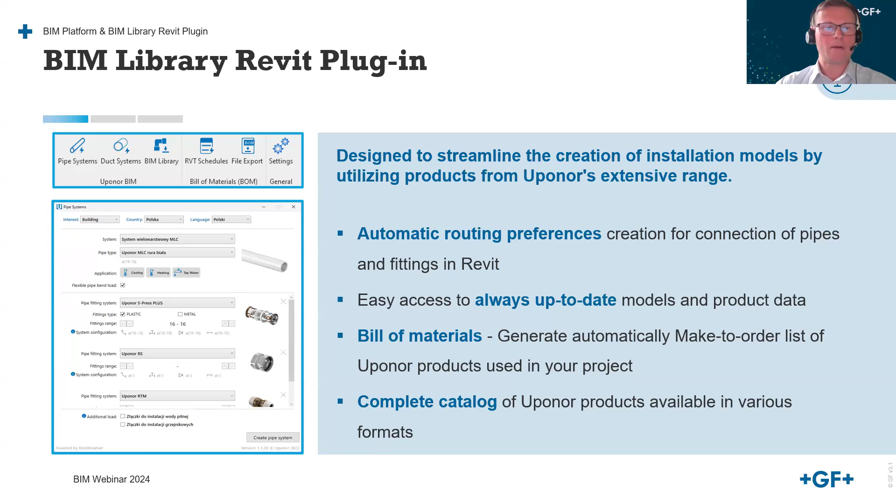Before we go to Revit and our plugin, I wanted to mention that generally today we are focused on how to support designers in Autodesk Revit software. However, to meet the growing demand for BIM components, we've expanded our cooperation with more software providers.

We've released a portfolio update for users of Solar, Linear, Trimble, and MagiCAD, allowing you to calculate projects using Uponor products in these platforms. We've also set up a process to enable communication between these software tools and the UFH Revit plugin.

If you have questions, feel free to contact us. More software integrations, of course, will be added next year.

Guys, it's time for the first case in Revit. So let's go to my Revit software - it's Revit 2022. I prepared for today case 1, transition between different pipework systems, and case 2, inserting a manifold from the Uponor BIM library plugin. Both I will try to solve thanks to our plugin.

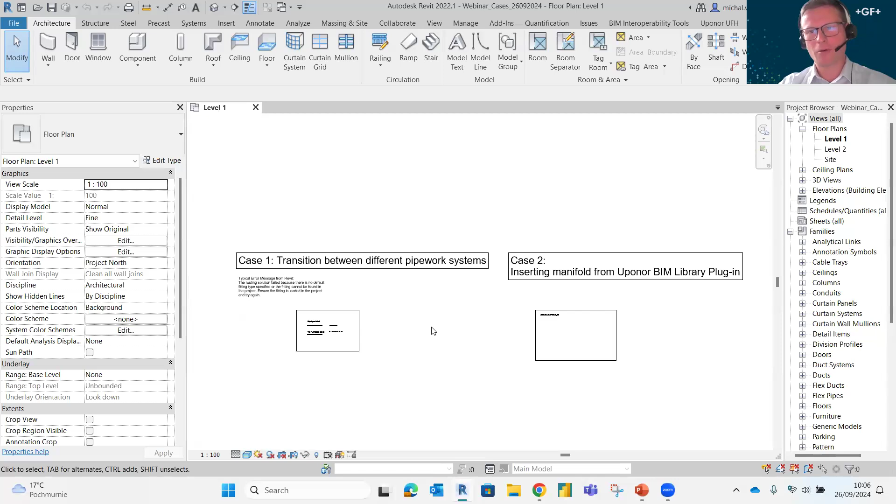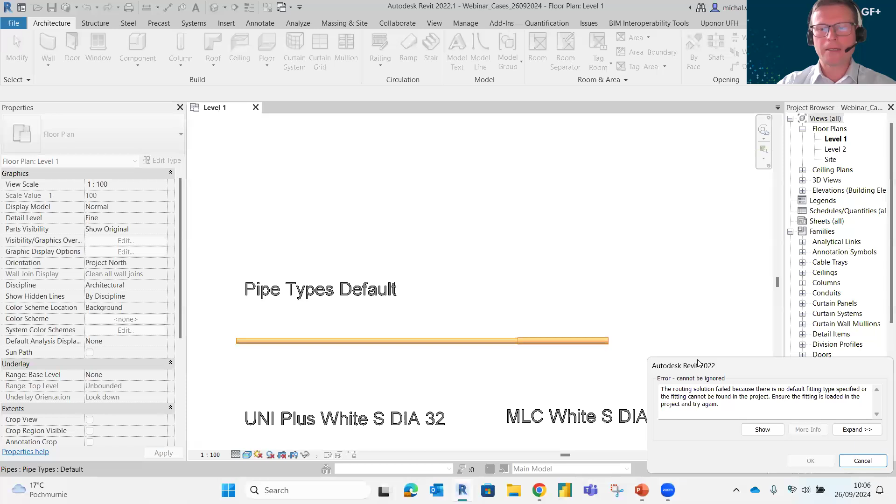But let's check what could be the potential typical issue. When you start the project in Revit, this is probably obvious for frequent Revit users, but if you use generic pipework systems, as you can see in properties, pipe types as default, and you try to make a transition, for example in that case, Revit generates this error: the routing solution failed because there is no default fitting type specified. This is one of the typical issues, especially at the beginning.

As you can see, when you select this default pipe, you go to edit type and to routing preferences - it's totally empty.

Nothing is filled, no families loaded in the project. This is a typical situation.

However, with our plugin, which you can find on the top after installation, Uponor BIM, you can see a few icons. Going from left: pipe systems, duct systems, BIM library, Revit schedules, file export, settings, connect elements, count pipe length, and patterns.

Today, to solve this particular issue, I will use pipe systems, and I will show you how to go through this case. So let's go to pipe systems now. I click the icon.

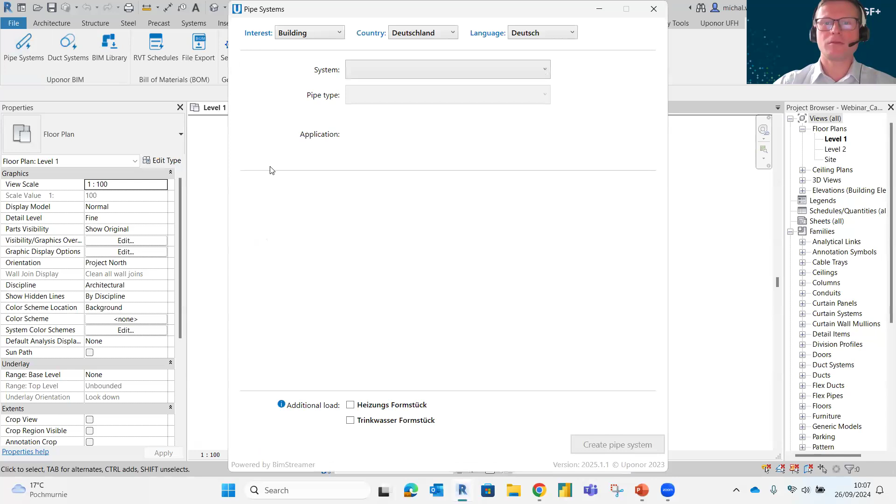Just to teach you, the first thing important to solve this case is to choose the interest. There is infra and building. We are inside today, so let's choose building. It's set to Deutschland as a market, but you can change it to any of your locations. Let's keep Deutschland for these purposes.

Here we've got the option to use always English language if you want, or the native language, so in that case the German one. But because I don't know German, let me choose English, of course.

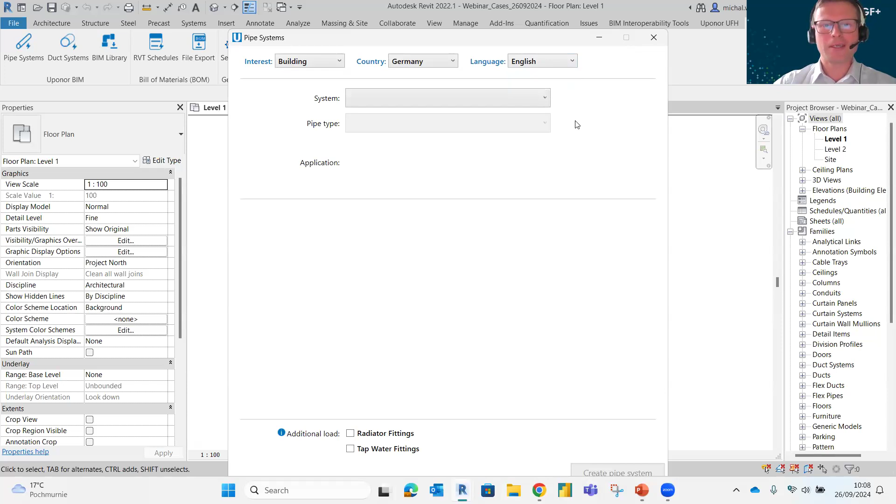And then we can go to choose the right system. As you can see here, we've got some heating and cooling pipes, local heat distribution, and so on. For purposes of this meeting, let's choose multi-layer pipe system.

Under pipe type, let's choose the MLC pipe white S. As you can see, you already have the preview of the dimensions, so diameters available. The general application, this pipework is designed for heating, cooling, and tap water.

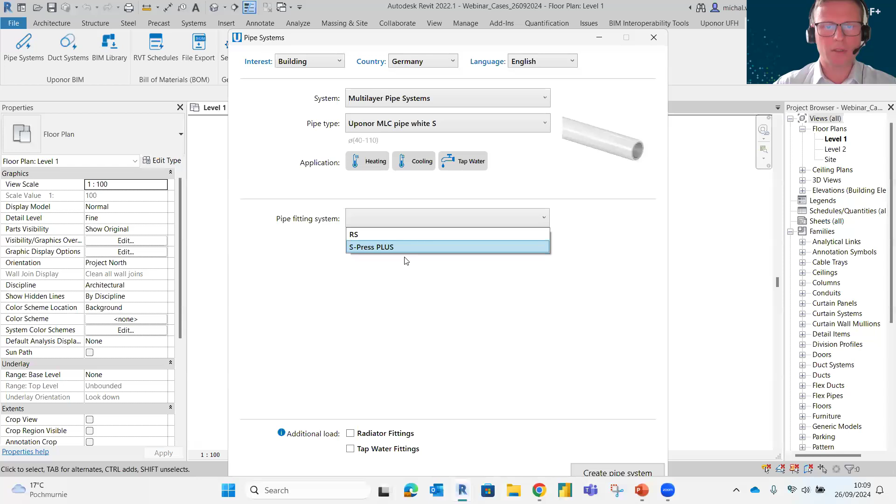Of course, we need to specify a pipe fitting system. There are two options, let's choose S-Press Plus in that case. As you can see, by default the plastic fittings are selected, so those products will be imported and loaded into your project because it's the economic point of view. But if you prefer metal, this is not a problem.

You can choose that. Note that the system doesn't completely cover the pipe range. You can solve it by using other systems or other pipe fitting systems. Generally it's not a problem for this case, but just mind that you have to always be aware of such a situation. If you also know that you will need other fittings for radiator or tap water in your project, you can tick them and they will be automatically loaded into your project.

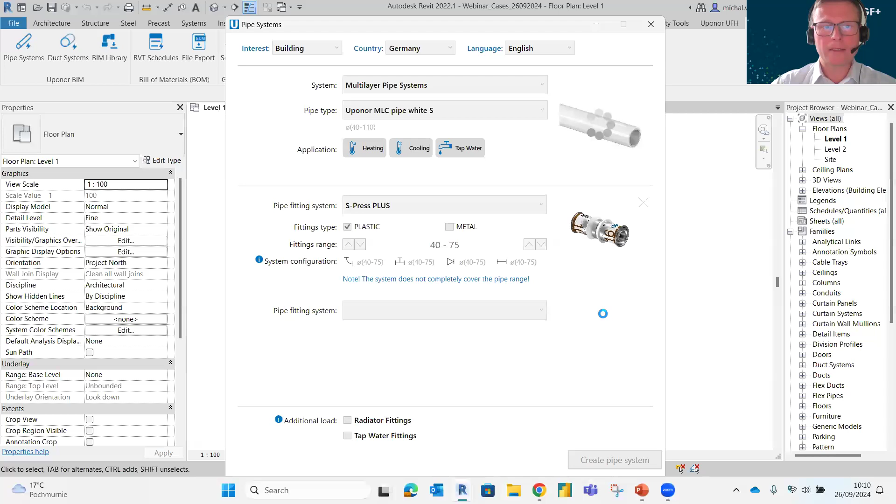If you are done, and we are done now, let's choose the Create Pipe System button. Now our plugin is loading the models, the families, into our project. As you can see, pipe system created successfully. We can click OK, close this window, and go back to our case.

So as I mentioned, we want to make a transition between different pipework systems with different diameters. I've done the same for other pipework, Uni Plus White S DIA, so this is already created.

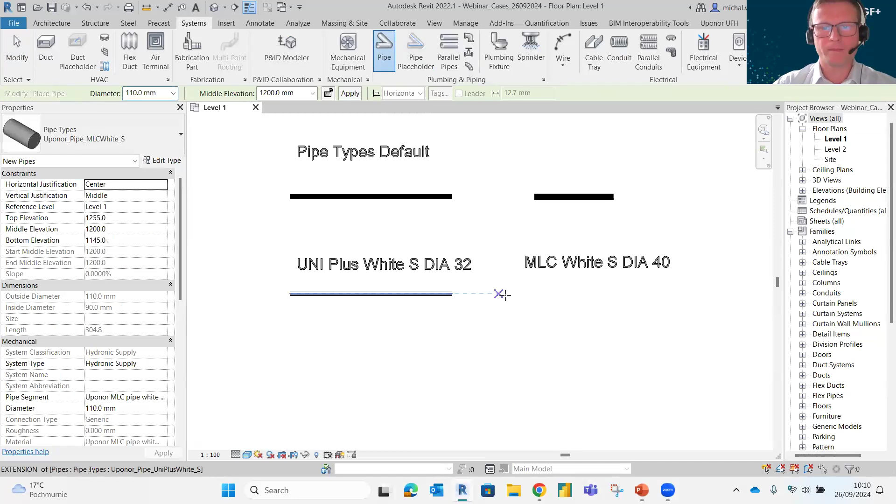Now, whatever, PI from keyboard or using systems here and creating pipe, let's draw the pipework which I already downloaded using our plugin. Let's choose the MLC White S here and put it here. Let's change diameter to 40.

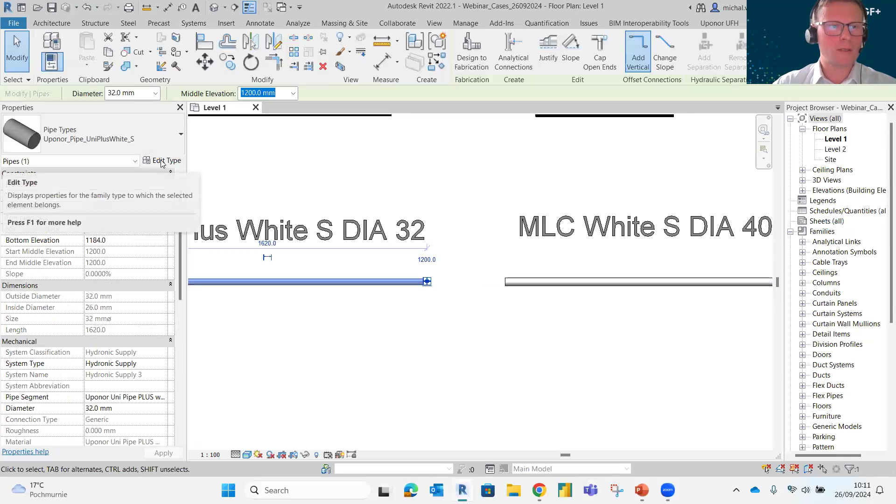And as you can see, still, Autodesk Revit doesn't allow you to create this transition. This is fine, this is normal. How to solve it? Of course we need to go to properties, edit type, and go to routing preferences.

As you can see now, the routing preferences are filled thanks to our plugin, so generally we are much closer to solving this issue. However, in that case, let's go to transition.

Always make sure here we have only one position, but sometimes it can happen there are more fittings in this system. Always make sure that both systems you want to make a transition between have the same fitting at the first position. There is priority, Revit reads the first position first.

The tip here is to change the minimum size to all. Click OK, click apply. Okay, this was done for Uni Plus White S.

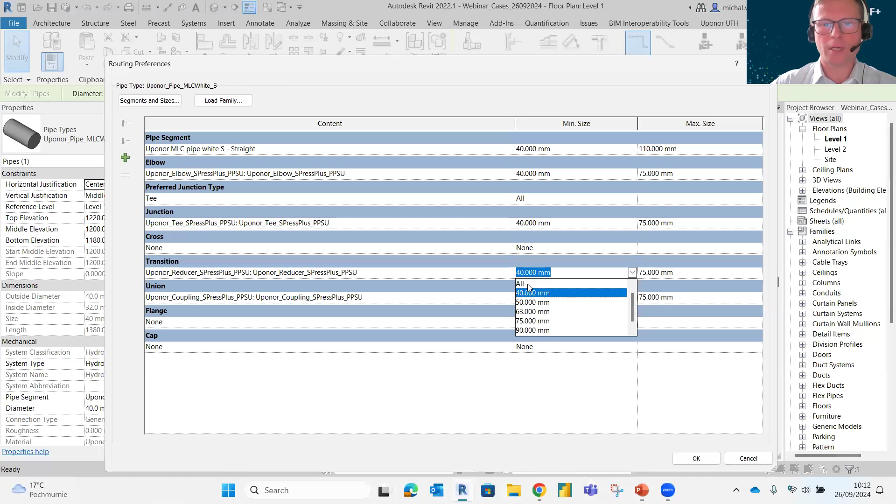Let's do exactly the same for another pipework system. So we go to routing preferences, under transition we check that we have the same fitting, and let's change minimum size to all here. Let's apply, let's click OK, and let's try now to create this transition.

As you can see, the transition is generated automatically, and that's what we wanted to achieve. That was the first case. Yeah, time is ticking.

Let's go to the second case. The second case might seem very easy because we would like to insert a manifold from the Uponor BIM library plugin, but I think we have to comment on this and show it.

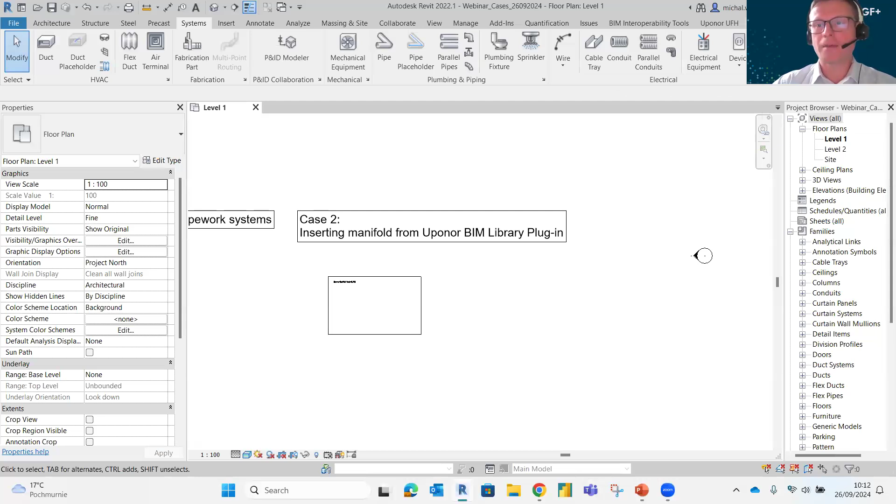Let's go to our Uponor BIM plugin. There is this third icon from the left, BIM library. Let's click it. As you can see here, we see our portfolio.

This is also important, to choose the interest first here. It's okay, we are in Germany, we use English language.

There are a couple of options for how to find the product you are interested in. If you know the article number of the product, you can type it directly here. If you know it's a manifold, for example as in our case, you can just select it in the browser tree. Importantly, the products available here are filtered to those available in the German market, so you're absolutely sure you can buy it, install it, and take it to the construction site.

Also, you can go by application. So if you'd like to check more of our products, you can choose things like heating and cooling pipes or manifolds, local heat distribution.

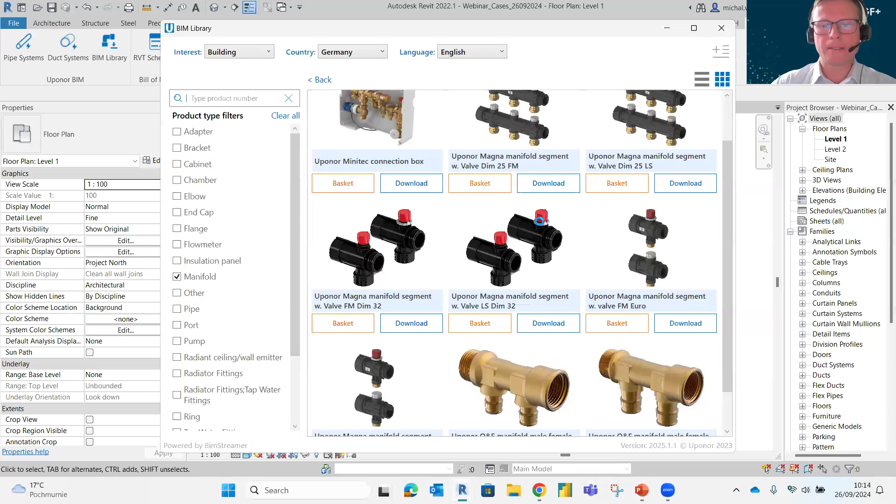For today's reasons, let's go to manifold. We are in Germany, and let's find maybe one or two products which we will put into our new project. Let's choose the Uponor Vario M manifold with flow meter. You can directly download it, or if you know you'll need other families or models, you can put it into the basket. Up to you - for this purpose, let's download it directly to our project.

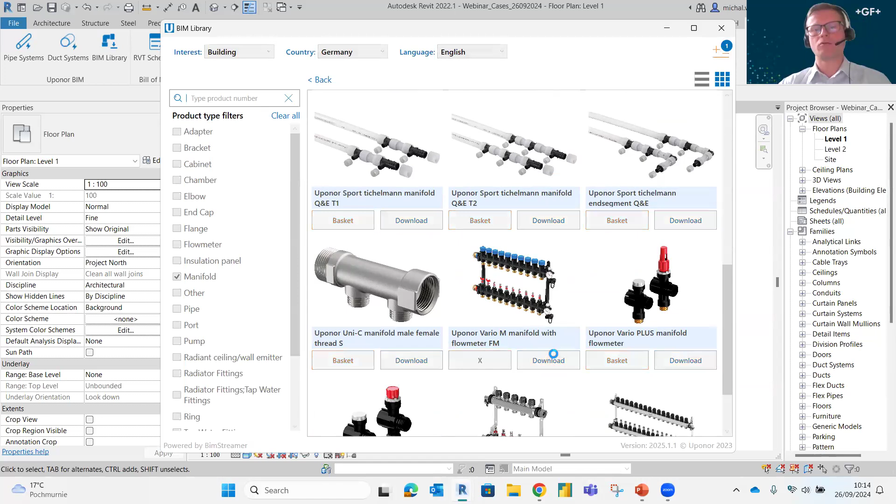The model, the family is already loading. Yes, it's here. Let's put it somewhere down here. I'm selecting this model now. As you can see, the manifold Vario MFM is loaded, and all possible outlets are here.

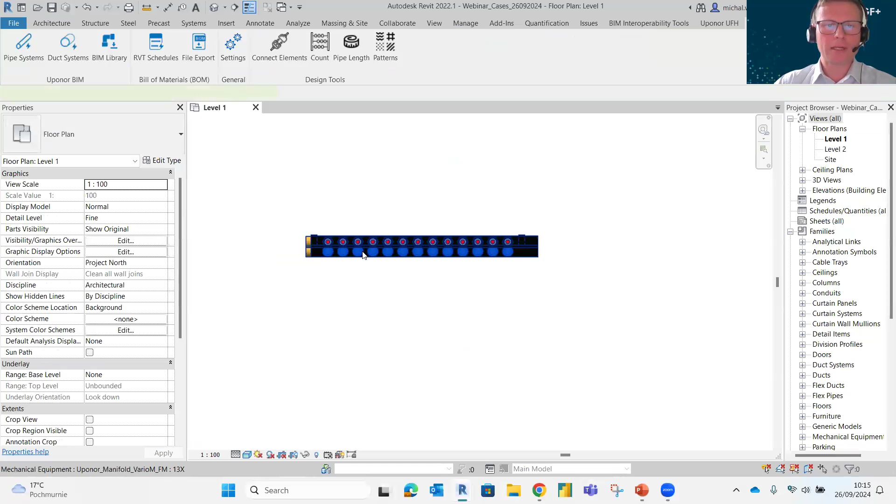A very important remark here is that our general suggestion, when using manufacturer families and models, is not to flip them. Please be very careful when you want to mirror something using the native feature of Revit. For example, in this case, let's go to 3D.

You see that the main return and supply pipework goes from the left, probably from the riser, from some kind of plant room, from the main heat source. If in your case you need to show it on the right side, don't flip it, as I mentioned.

Instead, select the family and always check what parameters are applied here by the company. In this case, as you can see under the construction tab in properties, we have a few parameters we added. To solve this issue, you can just select swap, and as you can see, this main run of pipework from the plant room, from the main heat source, will change position to the right side.

Let's do this again - swap - and this is the right, correct way to do it.

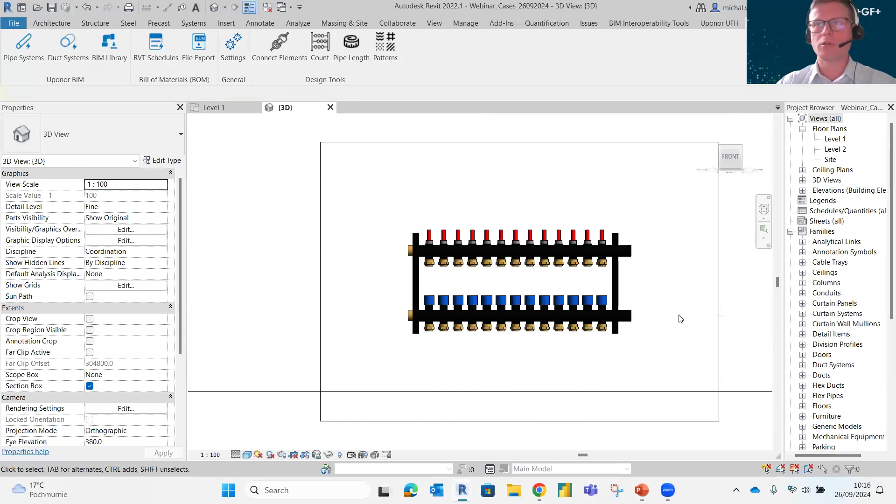If you, for example, need to add actuators - for example, to open or close the water flow to a particular zone loop - when you select the family, you've got that possibility here under actuator. You can add it by ticking the box. It should be a little bit bigger down here.

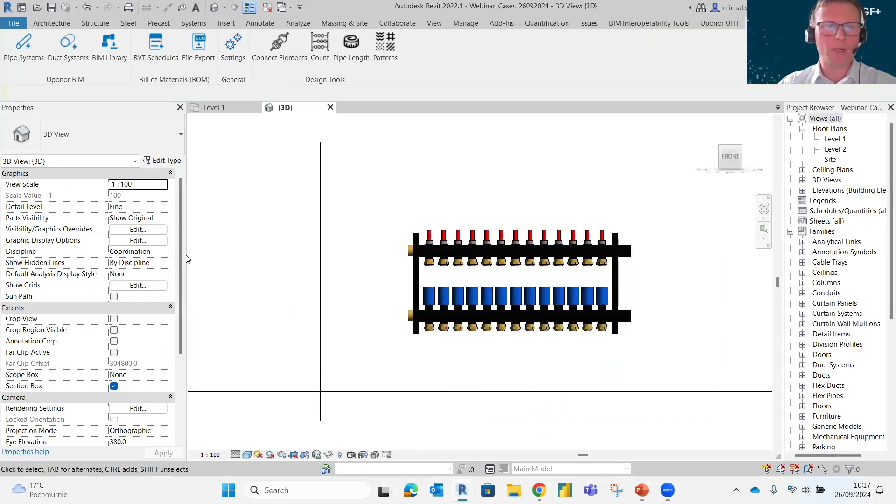What's also important, I think - sometimes let me drag it a little bit - sometimes we want to exchange the return with the supply on the upper bar. So when you select it, there is also an option to do so.

So, exchange lower upper bar. Now please note the return is below at the bottom. After ticking this, it should be replaced.

What already happened? Let's select it, and I'd like to show you another important thing - to avoid overlapping pipework in the layout of the return and supply, which goes to or from the manifold.

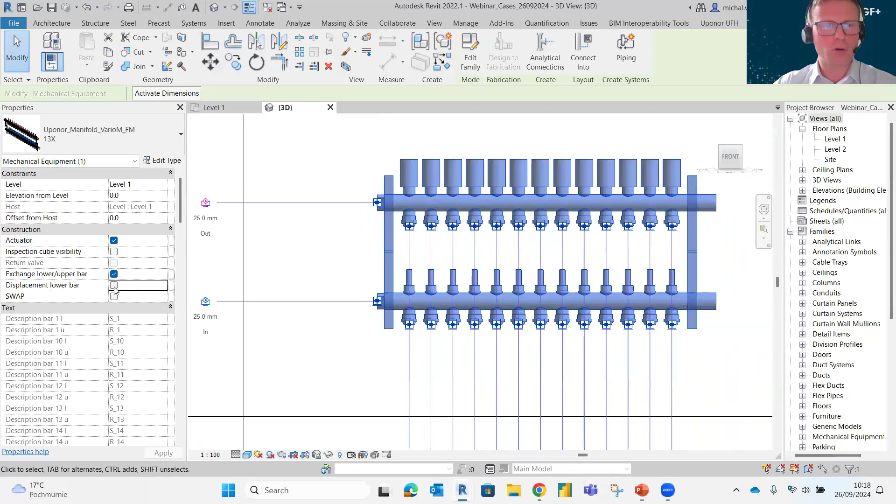You have a parameter here called displacement lower bar. If you select it, the connections will be moved a little bit to the right. When you deselect it, both of them will be one above another. So if you'd like to see them in a more readable version, click displacement lower bar, and I'll do it like that.

Okay, let's go back to our layout. Those were the two cases I wanted to cover today.

Now the question is where you can find this plugin, and all our other stuff. This is the BIM Platform, a website. Let's go to our website now - this is www.bim.uponor.com, our BIM platform, which we are really proud of.

The first choice you have to make is also choosing your interest, Uponor Building or Uponor Infra. Let's choose Uponor Building, and let's go to BIM Library.

As you can see, this is very similar to what you've got in Revit, but here we've got other formats for non-Revit users, which I'll cover in a moment, based on the same scenario. First, go here and choose your market, choose your country. Let's choose Germany. Also like in Revit, you have options to choose native language or English. Let me choose English. Now we are sure this portfolio is filtered to what is available in Germany.

Let's speak a bit about what UFH Revit Plug-in is. It's an exceptional tool that allows you to design, calculate, and model your underfloor heating project directly in Revit software. Today we will focus on two aspects of the plugin. One is quick project estimation, so you'll see how quickly you can arrive at hydraulic calculation and a complete bill of material. Then later I will show you our new innovative features developed recently by our team, including automatic feed pipe generation from the path and copy and mirror functions.

Let's jump to Revit then. All right, right now you should see my Revit software opened. I have a model opened here with some Revit architecture linked. I also have some spaces put here already in this apartment, and based on this apartment I will show you today how to get a quick estimation of your underfloor heating project.

One more thing maybe about the plugin—where it is located. As Michał mentioned, you can download this plugin directly from the BIM platform. And after you download and install it, you will see this as an additional tab here on your Revit ribbon.

So I have it open, I have it installed. Let's start with our designing process.

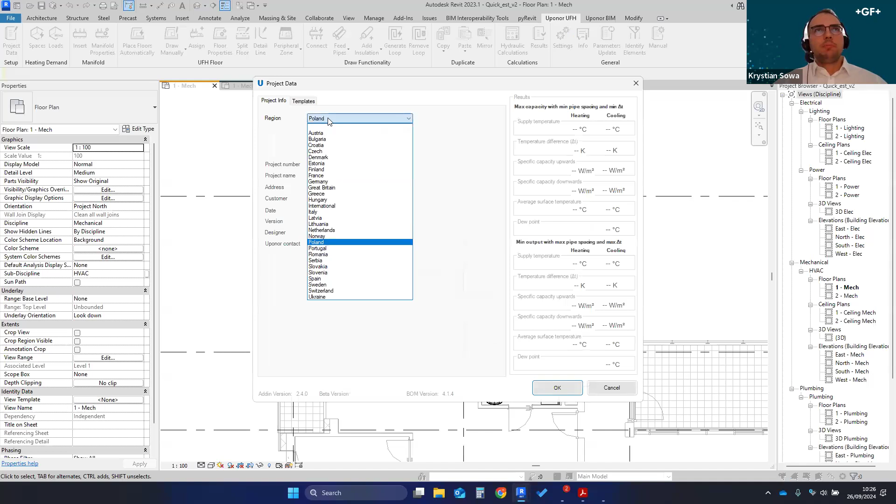Michał today started with Germany, so let's keep it like this. I will select Germany as well. Click apply. Selecting this region will ensure you that all of the items that you will be selecting with the plugin will be available in a given region, so you will avoid some mistakes and unnecessary work.

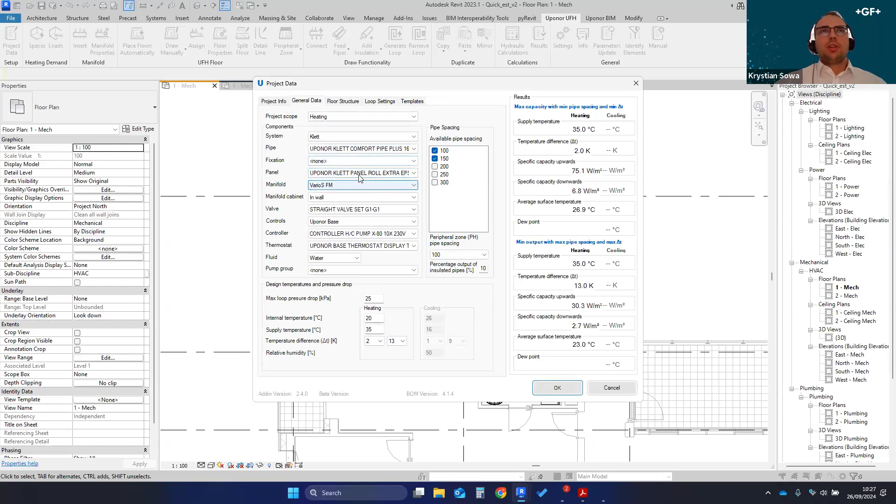In the general data tab, you will find the most important settings for your project. Starting from the top, we have the project scope, a very important setting. As I've mentioned, our plugin allows for heating and cooling calculations, so you can select simple heating, simple cooling, or a mix of these two. In my case, I would go for heating and cooling today.

Then you will see that already pre-filled is the list of the components of your underfloor heating system. This was pre-filled with our top products for each region, just to speed up your work. But of course you can adjust it to your own preference, so if you would like to use a different system, you can select it from this drop-down list.

In this list, we'll have all of the systems that are right now available in our region, which is Germany. What else can be found in these components are elements of the underfloor heating system, which is the pipe, panel, manifold, valve, room control system, etc. All of these settings you can specify here.

In the middle, you will find available pipe spacing that can be adjusted. In my case, I have selected 100, 150 for my project. At the bottom, we find design temperatures and pressure drop: first the pressure drop, and then the design temperatures like internal supply and temperature difference.

Please take a look now at the right side of this window, which is a very important part of our plugin. In this area, you will see the preview of the results that can be achieved with the given parameters that were set up here.

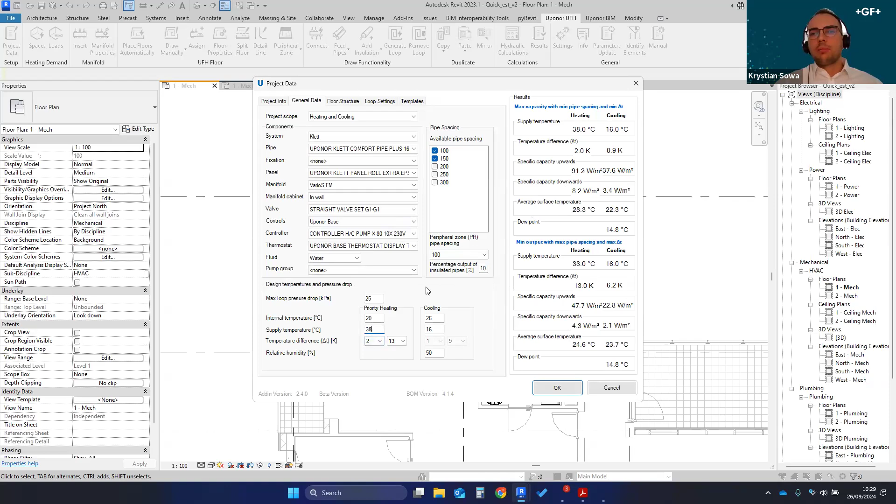All right, if everything was set up here, we can now go to the next tab, which would be the floor structure tab. Here we can set up two things: first, what is underneath the floor that we are designing, which will of course have an effect on our heat losses downwards, and second, also very important, the cross-section of our floor.

Each of the layers here will have an effect on our output up and down, so on our output and our heat losses.

Please take a look, for example, if I change the floor covering here - I have by default ceramic tiles and 90 watts per square meter of output. If I change it to, let's say, normal parquet, because parquet has much bigger resistance, it affects the output of the installation. So right now this output dropped from 90 to almost 65 watts per square meter.

As you can already tell, properly setting up all of these settings at the beginning of the project is very important, because it will ensure that later you get proper results from your hydraulic calculation of the installation.

We also have two additional tabs here: one is loop settings and the second is template, but I will not be focusing on these today, as we are only going to do at the beginning a quick estimation of your project.

So if you are doing a quick estimation, we will not be drawing any pipes in the model. Simply after everything was set up here, I will just click OK.

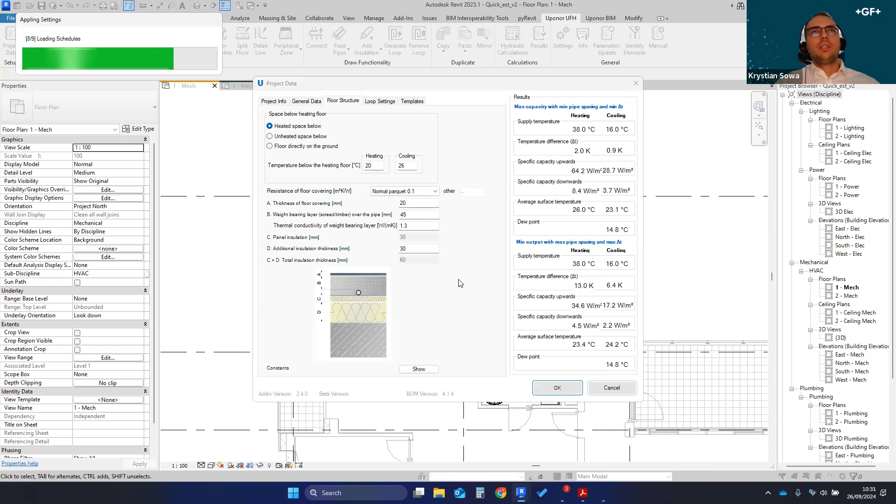This can take a bit of time, but thanks to selecting a region, you are sure that you will only design with correct items for each region. All right, this should be done exactly right now.

Before we start our design process, I always advise designers to use our view template for the floor plan, so let me change it right now. We provide the view template called UPO template. If you use this, which I always advise, you are sure that all the necessary visibility settings are correct, and you are seeing exactly what we want you to see so you can design properly with our plugin. So please always remember, while using our plugin, I strongly recommend using our view template.

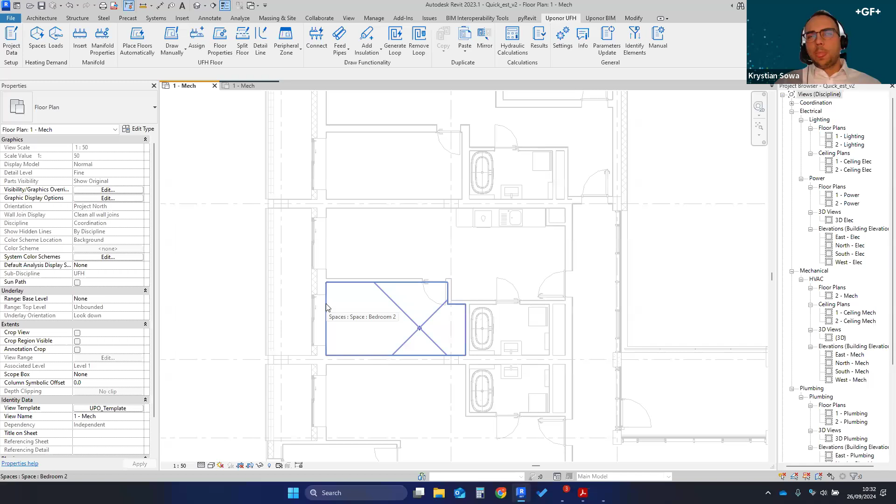All right, now would be the time to insert the spaces. If there are no spaces in your model, now would be the time to insert them. But I have them already inserted, as I showed you before. One more thing I'll mention about these spaces: I put some values in the design heating load parameter, because I'd like to show you how quickly you can transfer these parameters into our plugin.

So let's go to the third icon here, the loads icon. It will open a window with the list of all the spaces in the model, along with tables for design heating load, and in my case also cooling load, because as you remember in the general data, the scope was specified as heating and cooling.

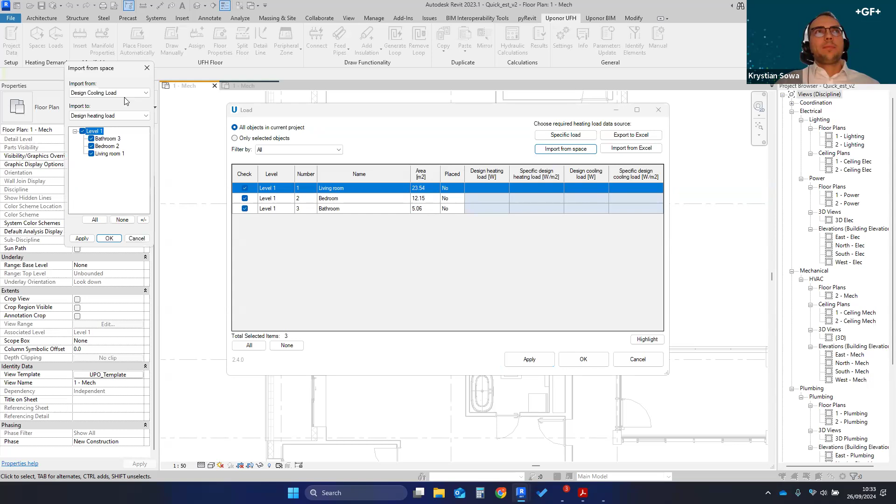So if I already have my heat demand value in some parameter in the space, I don't need to manually rewrite this into the plugin. I can simply use the option import from space, select the proper parameter - in my case, design heating load - click OK, and now these values are filled in for the correct spaces.

Another way to quickly put these values in is if you're assuming some coefficient. For example, for cooling, if you'd like to assume some value, let's say 30 watts per square meter, you can click on specific load, select cooling, put 30 watts per square meter, click OK, and for all of these spaces this value would be filled in already.

Another option is to import from an Excel file if you have your heat demand or cooling demand there. Or please remember you can always just put these values in manually - if you have them in a PDF file or some other source, you can type them in manually. If everything was set up properly here, let's just click OK.

And right now, let's go to the real design, let's say, to where the fun begins. So we would start with inserting the manifold.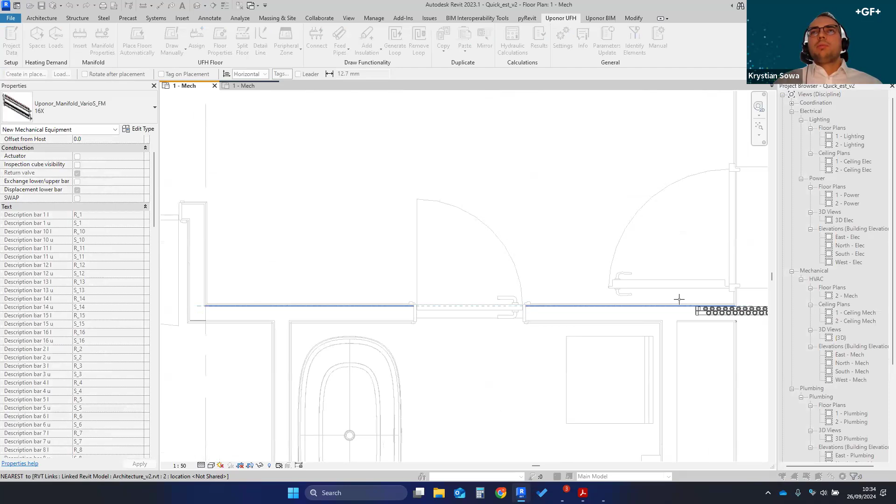So I would click on the insert icon here in the manifold part, and put my manifold. I can rotate it, of course, before placing it somewhere close to this bathroom, let's say.

Michał already told you a bit about this manifold, so I won't say much here, but I'll mention that Michał was talking about this displacement lower bar that allows you to avoid overlapping of the feed pipes. As you can tell, when inserting the manifold with our plugin, this parameter is checked by default - already checked in for your better use.

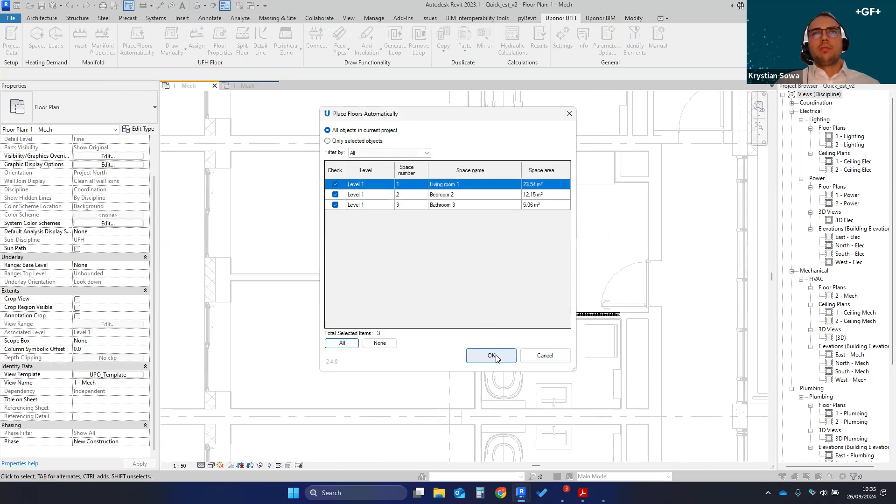Now that we have the manifold in our model, next we need to insert our heating and cooling floors. So I will use the option place floors automatically. In this window, I would select all of the spaces - in all three, I want to insert the floors. Click OK, and these green floors appeared in my model. If we click on them, we can tell this is the UFH standard zone floor.

Now that I have floors in the model, next I need to connect these floors together with my manifold, to assign them together. To do this, I will use the option Assign, located here. Select the manifold, select all of the floors, confirm with Finish. And now the plugin will also ask me about the name of the manifold.

Let's say I want to leave it as M1. Click OK. Now a few things will happen: these floors will be assigned to the manifold, and you'll see these connectors have appeared. These connectors indicate where you insert into the floor with the feed pipes coming from the manifold. After the calculation, they will get the pipe spacing, and you will see how to connect them.

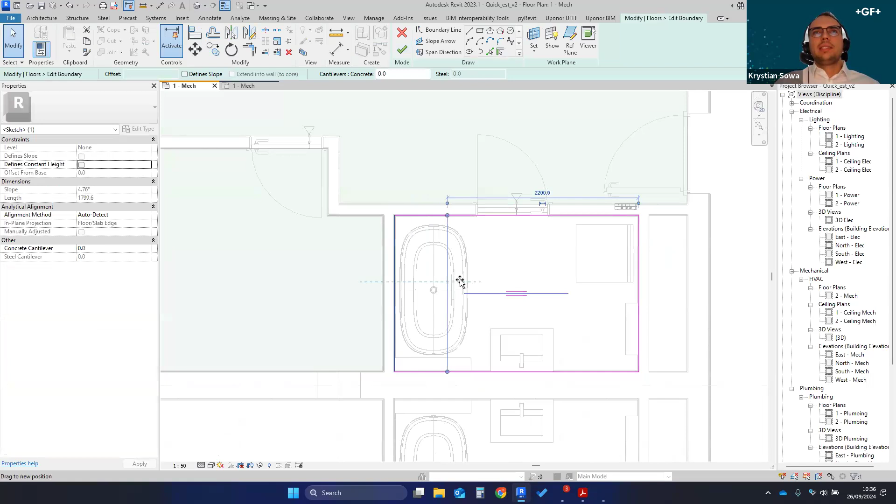Before we go to the hydraulic calculation, it might be needed to do some editing to your floors. For example, if you need to cut out some areas, let's say here underneath the bathtub, it is very easy using the Edit Boundary option. You just click Edit Boundary and edit the shape of the floor however you want. Let's do something like this. Click OK, and now underneath this bathtub we will have no underfloor heating placed.

Another way to edit the floor is to divide it. This area of the floor is pretty big, so we need to divide it into two parts. We can do this according to this wall. I would draw a detail line - this is the native Revit option, so if you type DL on the keyboard it gives you the same function. Then I click on split floor, select the floor, and select my line for the division. Click Finish, and I end up with two separate floors.

They are already connected to the manifold. After hydraulic calculation, the connector will appear, so you do not have to worry about this at all.

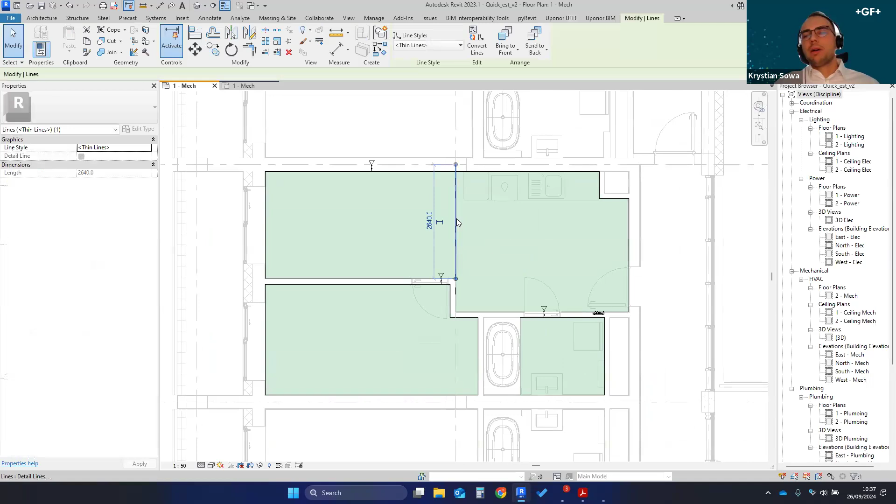One more thing before hydraulic calculation that you might want to do is, as you remember, in general data we were setting up, for example, floor covering. We set this as parquet for all of the floors, but you can edit each floor individually, of course.

So I have opened here the bathroom floor. I will change, for example, the supply temperature. I will also change the covering here in the floor structure tab - so from parquet I would just go to thin ceramic tiles. I think it would be more appropriate for our bathroom.

If this initial editing was done by you, and if required - in my case I needed to cut this out and divide this into two - then it's a good time to go to the hydraulic calculation window. Let's click here in part calculations. There's the hydraulic calculation window. Click OK. Select the manifold. Click OK.

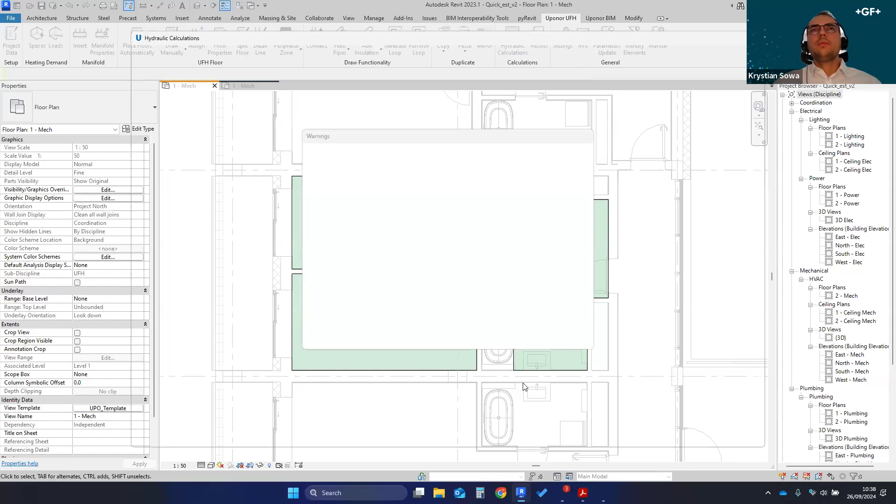Two windows have appeared. The first window is regarding warnings and errors within your installation. You can expect warnings about not covering your heat demand, or about laminar flow, exceeded temperatures, and so on. These types of warnings might appear here. You can close this window right here.

Let's talk a bit about this hydraulic calculation window. This window was divided by us into two parts: the part at the top is regarding the manifolds, and the part at the bottom is regarding the floors. All of the necessary parameters were placed here in the manifolds and floors tab. You can scroll to the right to see all of them.

If there is a need for you to edit, for example, pipe spacing or delta T, you can easily do so. For example, if you want to edit pipe spacing, you just expand the list and select a different pipe spacing. If you want to edit delta T, you can just type in a different value, click apply, and it will be recalculated.

You can also easily switch here between heating and cooling modes. So if you see here, I am in heating mode. If I just click here, I would be easily switched to the cooling calculations.

You might be wondering how we were able to get these calculations already at this stage, because I'd like to remind you that we do not have any pipe yet inside our model. We were able to do this based on virtual lengths of the pipes - calculating the distance between the connector and the manifold, and also calculating the loop length inside the floor based on the area and the pipe spacing. Thanks to this, without drawing any pipes in your model, you are able to get hydraulic calculation, balancing, and also the bill of material. Let me close this window by clicking OK.

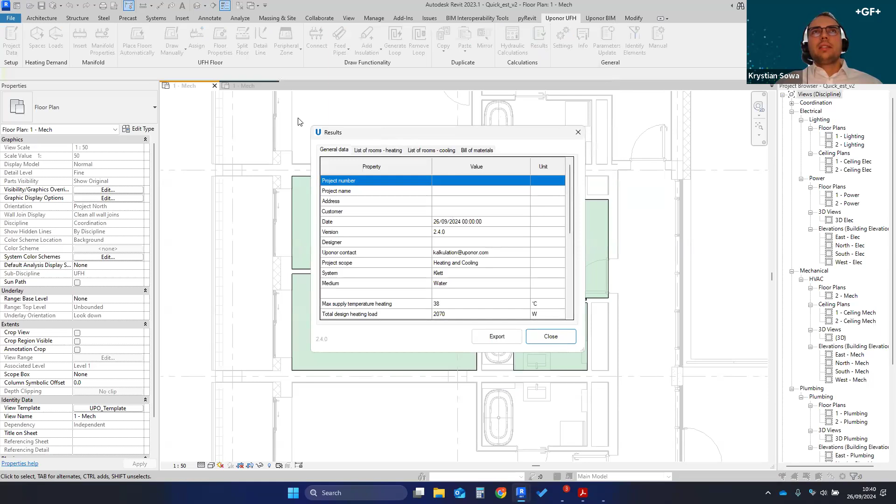And just to confirm my words, I will now go to the results icon, select the manifold, click OK, and we can already inspect the results for our quick estimation of the project. So here we have the general data, list of rooms heating, list of rooms cooling, and lastly, bill of materials. This can be exported to PDF as well.

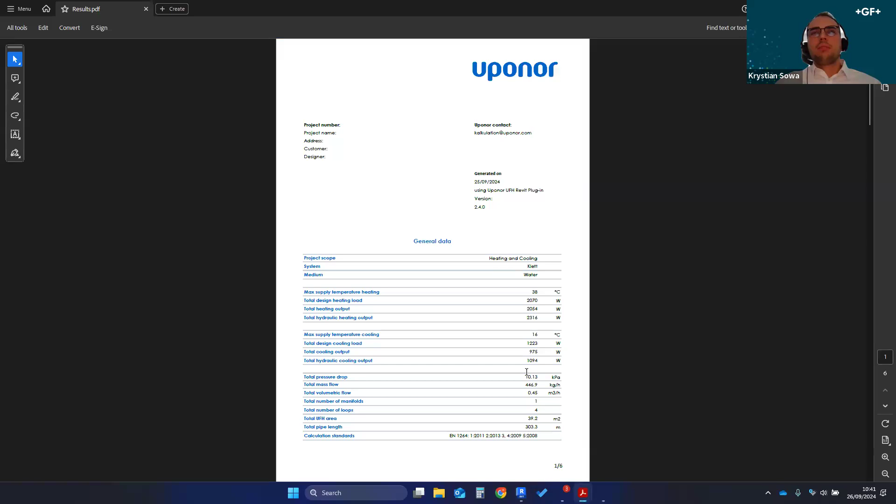Let me quickly show you this PDF that was exported. So once again, we have the general data, list of rooms cooling, heating, list of rooms for cooling. Then there is results for hydraulic calculation, the same as what you saw in the hydraulic calculation window in the plugin. And lastly, there is a full bill of material.

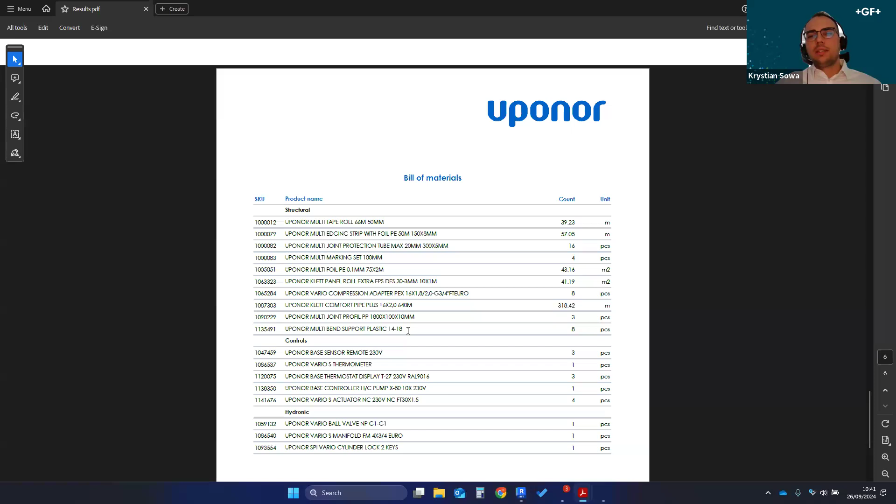As you noticed in the model, from the families, basically I have only the manifold right now. This is the only family that I have in my model. But it was not a problem for our plugin to generate a full bill of material with all of the items necessary to complete this installation.

So I hope to conclude this first part, I hope this would be something useful for you. And if you would face the need of doing a quick project estimation, or if you are at the early stage of your project and you want to present some initial bill of materials, then it is very easy. I think without my talking, it would take like 10 minutes to do this apartment, to be honest with you. If you are fluent with this plugin, maybe even less. So it is very quick how fast you can do this type of estimation for your project.

That's it when it comes to this basic quick estimation of the project. And right now, I would like to show you some new features that we've developed for this plugin, because we also know that this plugin can and is used for quick estimation, but also our clients use it for the full complete project of this type of installations.

And if you were doing this in the past, you already know that drawing all of these feed pipes from the manifold, connecting to the floors and so on, is taking lots and lots of time. And we are constantly thinking how to speed up this process for you.

So let me show you now what are the couple of features that might enhance and speed up your design process. So I would firstly adjust my connectors. Please allow me to do so. I would put them in the correct place where I would like to enter with my pipes. And this one, maybe I will move a bit here. Maybe also move the manifold a bit from this wall.

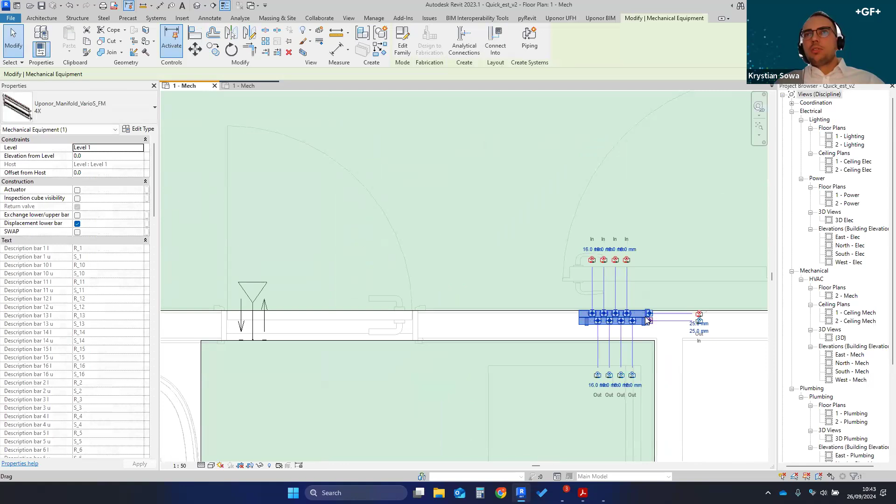All right, and the first part for generating the feed pipes would be to use the option connect that we have here, because you know, the manifold is placed at a certain height. You would need to go with a vertical pipe, then make a bend, then insert the floor. To avoid all of this, please always use our option connect. All you need to do is select the manifold, accept these properties, and select the point for direction somewhere in here, let's say. Already it was generated automatically.

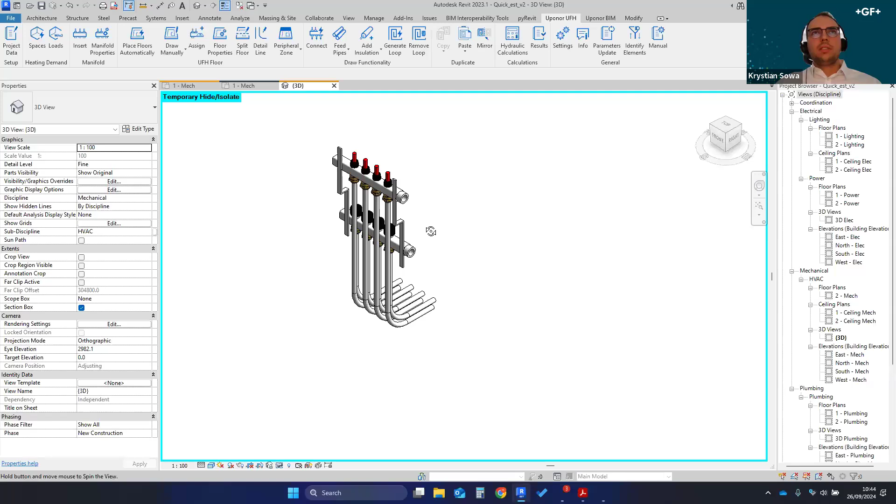Let me select this, go to 3D. Since we are in Revit, let's use the advantages of this software. So go to the 3D view, maybe also do it like this. And please see, this was generated all automatically. I just clicked one function and all of these pipes with bends, at the proper height, inserting the floors, all of this generated automatically.

But that's not the end. You do not need to anymore draw these feed pipes one by one, because we recently developed this new feature called generating from path. What it means is that all you need to do now is draw the path from the detail line. Once again, we will be using this detail line here. And then based on this path, the plugin will generate feed pipes for you.

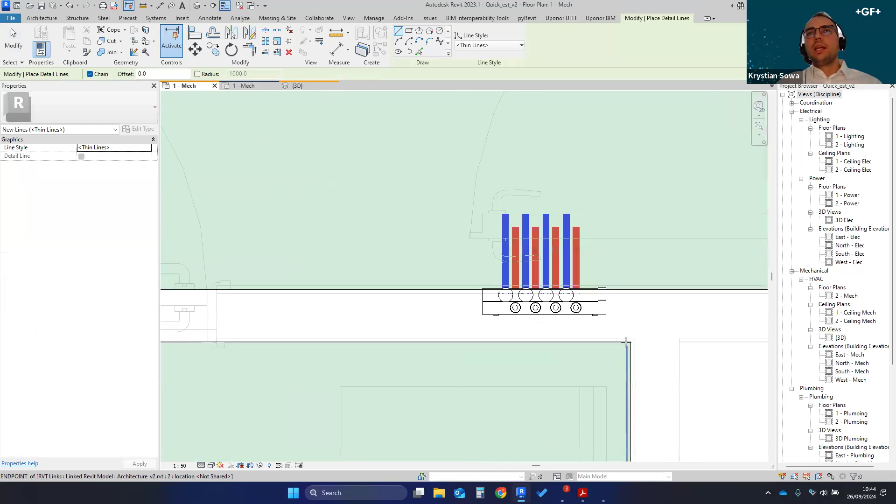So let's start doing so. I will type DL on my keyboard, and somewhere within the box of the manifold, doesn't matter where, let's say somewhere in here, I will just click. All you need to do is make sure that this line is within the box of the manifold. I will go and connect my first connector. Also the same case, does not need to be very precise, does not need to snap to anything. All you need to do is make sure that this line is within the box of the connector, and that's it.

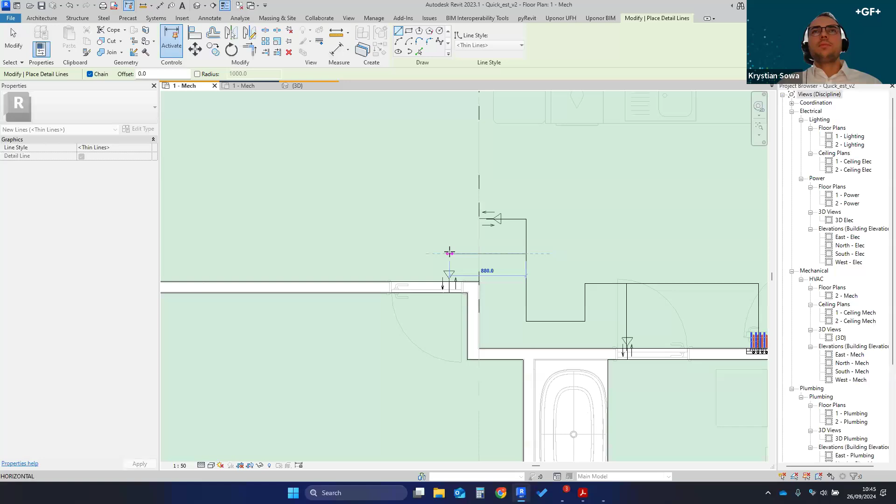The first connector is connected with my line. Now I will continue my path starting from here. Let's go down to fill out this gap, then up to the next connector, somewhere in the middle of it. All of my connectors here are connected.

This one I will leave for last, because if the manifold is located on the same floor as the floor you would like to connect, you need to cut out some part of the area to be able to easily bend the pipe. Because in Revit, we are not drawing lines, but drawing pipes, so you need space to properly bend it. I will show you that in a second.

But first, let's focus on this path that is now drawn. Let's click on feed pipes and generate from path, the first option here. Type in the pipe spacing you want to use, so let's stick with 150. Now select all of the detail lines that were drawn. I will draw this rectangle and click finish.

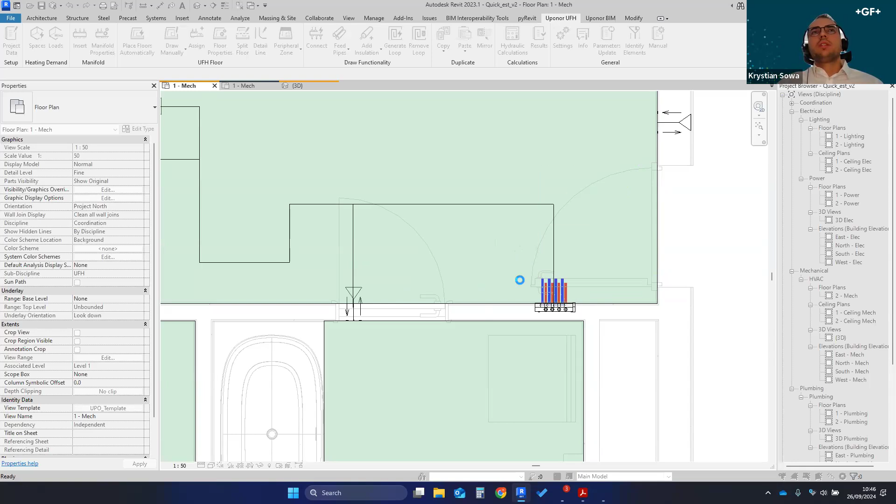All you need to do is point to the plugin from which side of the connector you want to start, since you can start from right or left. I want to leave this right feed pipes for this connector, so I'll click somewhere on the left, and that's it. All of this was generated automatically. Let me zoom out to give you a full picture: generate from path, select all my feed pipes, click finish, point for direction, the path disappears, and what appears in its place is the connectors with the proper pipe spacing of 150 millimeters that we specified.

I hope this feature will speed up your design process. It is already used by our customers and our designing team, and we are improving it all the time. I hope this might be a very good way for you to speed up your design process. Due to time limitations, I cannot show you the full process of designing here.

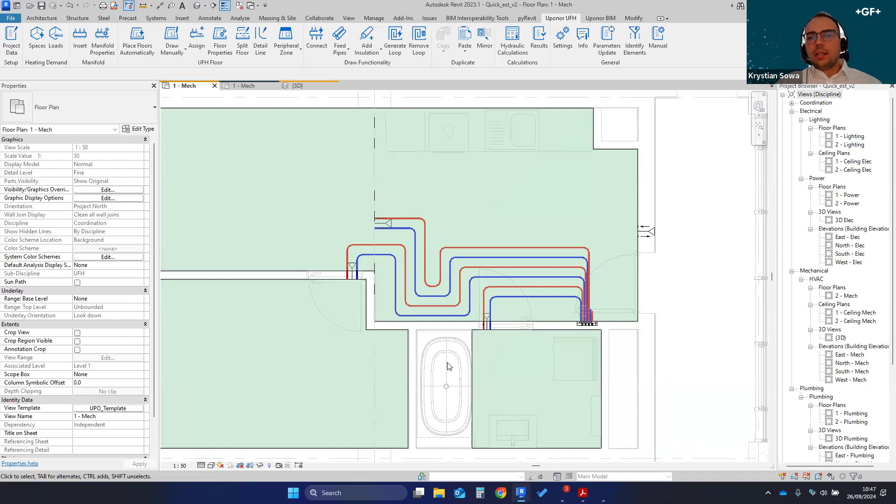So please allow me to jump to my second project that I have prepared. It is exactly the same project, but here you will see that the areas below the feed pipes were cut out and changed to type feed pipe zone. As I mentioned before, you need some space to bend the pipes to this connector. I simplified this, so use it in that case.

I sped this up because I wanted to show you two other features we have: copy and mirror. But before that, I would like to complete my installation, which of course means generating the loops. Sorry, not feed pipes, but the loops. You can draw this manually, but there's no need to with our plugin.

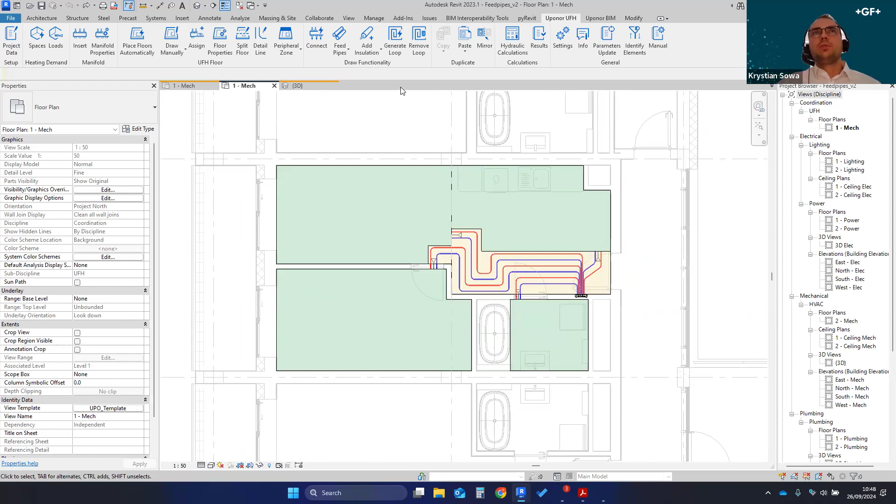We can click on the Generate Loop icon, select all of the floors, click finish, and the plugin will generate the proper shape of the loop. You can select between spiral and meander shape. In my case, I selected spiral, so this is the result I expected, and this is exactly what I got.

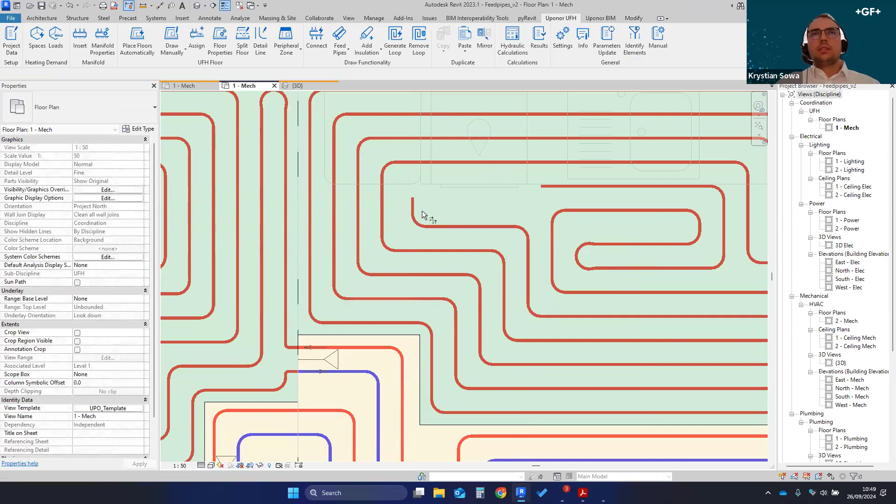If there is a need for you to edit the layout of the loop, of course it is possible. For example, let's say I would like to fill this gap a little bit more. I can simply edit this manually: delete this bend, and use draw pipe like this. Now we have this gap filled. So it's very easy to fill these gaps if needed to correct something, as you see.

Before I show you the copy and mirror functions, let's go to hydraulic calculations one more time and inspect what is happening there. You need to understand one important thing about this plugin: before, it was taking the virtual lengths of the pipes when they weren't in the model, but now, since all the pipes are already drawn, it will take the physical lengths directly into the hydraulic calculation window. So any changes you make, like filling this gap, will affect the hydraulic calculation.

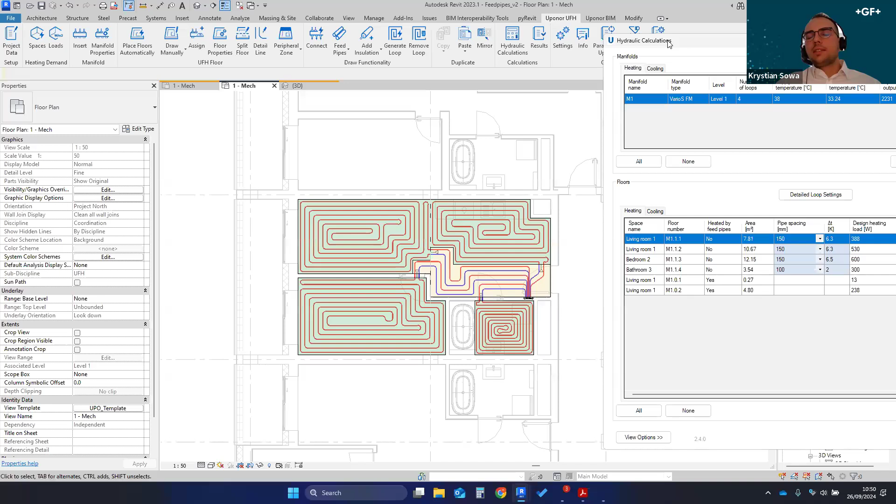So this is as close to the reality as possible, because you have exactly the pipes drawn and exactly the same loop length here in the hydraulic calculation window. If nothing is to be changed here, let's just click OK to confirm it.

The last two features I would like to present are mirroring and copying. As Michał mentioned, mirroring the manifold directly is something we do not advise - it would not work properly and would cause issues with the pipe systems. This is something we were able to correct within our plugin, and we developed these two features: copy and mirror.

I draw here a detail line because, as you see, the right side of this building is symmetrical. On the right side, I have exactly the mirror of the installation that is on the left, so you do not need to draw the second part from scratch. You can simply finish this part and then select it.

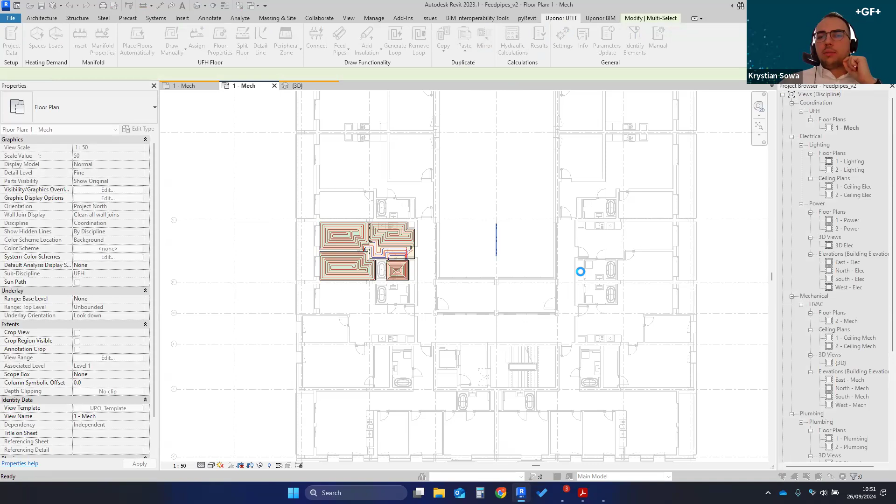Click on mirror here, select the line for mirroring - this detail line that I drew. Right now the plugin will mirror the whole installation, mirroring the manifold properly as well. It will also ask about the name of the new manifold, because two manifolds cannot have the same name, so we will specify a new name - let's call it M2 - and according to this new name, the systems will also be renamed.

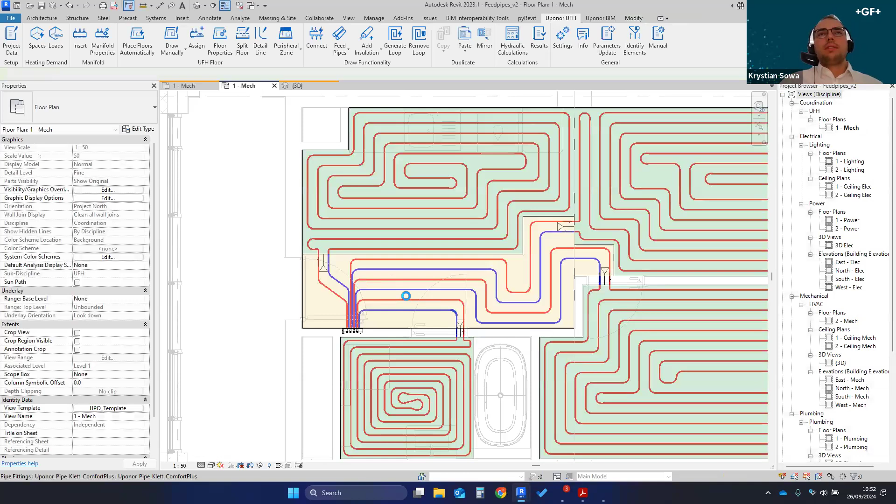Let's give it a second to do this job, and then we'll be able to see, after I zoom out, that this installation was mirrored exactly like it was here. You can click on the manifold and see that right now it is renamed to M2, and the systems were also renamed - system name is now M2, and in the loop it is also M2. That's how easy you can mirror the installation.

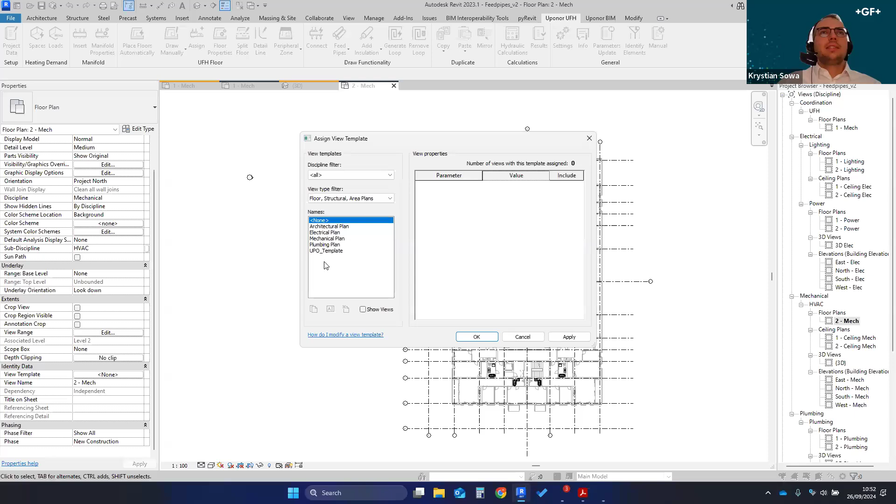The same way goes for copying it. So I will jump now to the second floor of my building. This is exactly the same floor that was below, so if this is the case, I will just set up once again the view template, go back to my floor below, and close this 3D view.

Select once again this installation, click copy between views - in my case, not in the same view but between views. Wait a bit for the plugin to put all of this necessary data to the clipboard, then jump to the second floor. Here I will use the option paste, and in my case, align to current view - I'll choose this one.

And right now, the same case as with mirroring - the plugin will ask for the name of the new manifold. Let's say I would like to name it M3 to avoid naming it the same. Very quickly, the plugin will rename it and also rename all of the systems. So right now, if we select the pipe for example, you see that it is named M3.

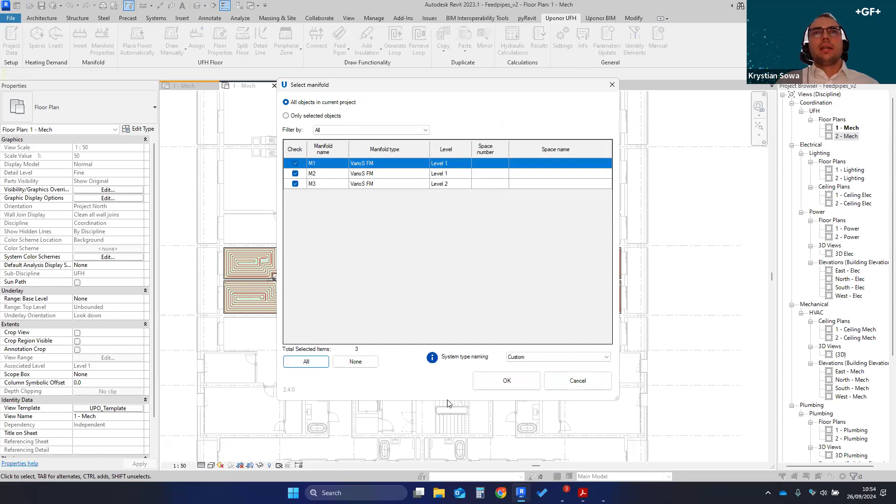Lastly, we can also go to the hydraulic calculation, so you can see that right now we will have 3 manifolds there. I will select all of them and click OK. I would like to show you that if your building is symmetrical, all you need to do is design one part, make sure it is properly set up, and then you can just mirror and copy it - no problem for this plugin. Let me close the results window, and you will see here exactly the same, or very similar, results now in these three different manifolds.

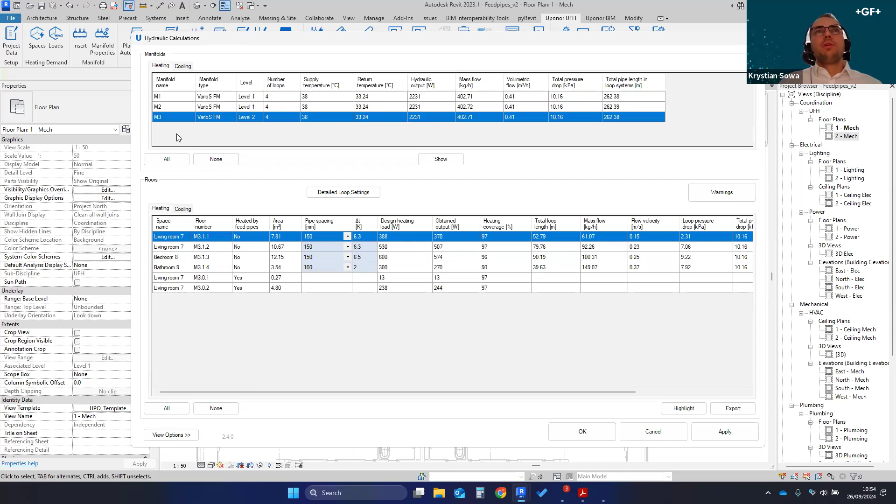All right guys, that would be it from my side. This is all that I wanted to show you. So just to sum this up, the first part was regarding hydraulic quick project estimation, and the second part about our new innovative features. This is, of course, not covering the whole abilities of our plugin, the whole scope of this plugin.

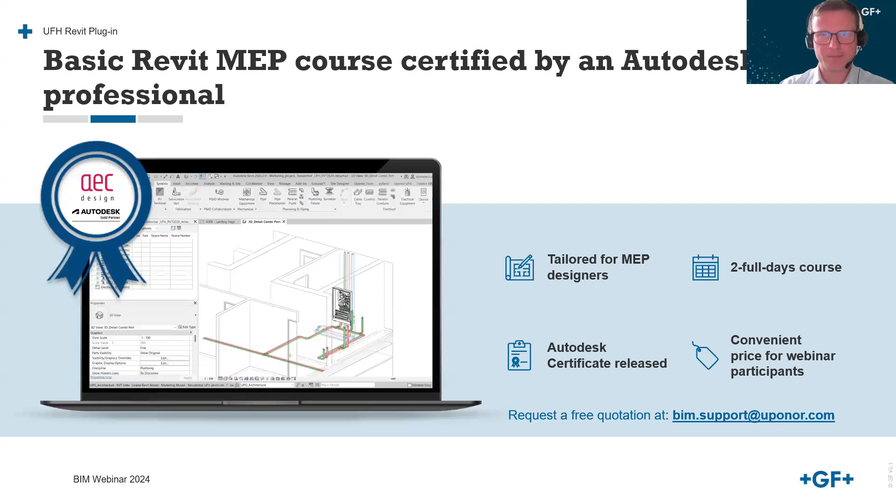Now it's tough for me to take part after your presentation, guys. So I will try to go to it. Just a second. Okay, so I am Domenico.

I am also part of the BIM Service team. Like Miko, I'm working strictly in contact with the customer, in my case from the DACH region, Southwestern Europe, and outside of Europe, so in the international environment.

I'm here today to present our BIM design services. It's a topic particularly important for me because I had the luck to contribute to the development of these services. We kept them for last, not because they're less important than the tools the guys presented, but because this closes the circle of our offering.

With Miko and Chris, you had the possibility to see our free tools that are a way to get in contact with the customer, but on different levels. With the library, you use the components on your own to start modeling your project. On the second level, you use our tool, and you get even closer to us because of the support that Miko presented. And here, basically, you get the closest possible to the Uponor design team because you ask us to prepare the design for you.

There are a lot of points I could present as advantages of our service, but I want to be practical and leave that to the marketing or the website. What I really think is the benefit of this service is the expertise we put in the game. Uponor has been in the design and engineering field for many years. So in this service, you find the BIM competencies, the engineering competencies our design team brings, and the knowledge of our solutions and portfolio. Combining these three points makes us the best partner to design using our solutions. This is the real strength of our BIM service.

We mean it not only for designers, because we have a lot of scripts and tools, beyond the one we showed, that we use internally to speed up the process. But also because we know what installers need. So this is a very good part of our offering for designers, installers, and contractors, and you will also see it for off-site modular manufacturers. But I want to keep this practical because I want to keep up with the guys — we'll have a challenge later on how many guests stayed until my part, so I need to compete here.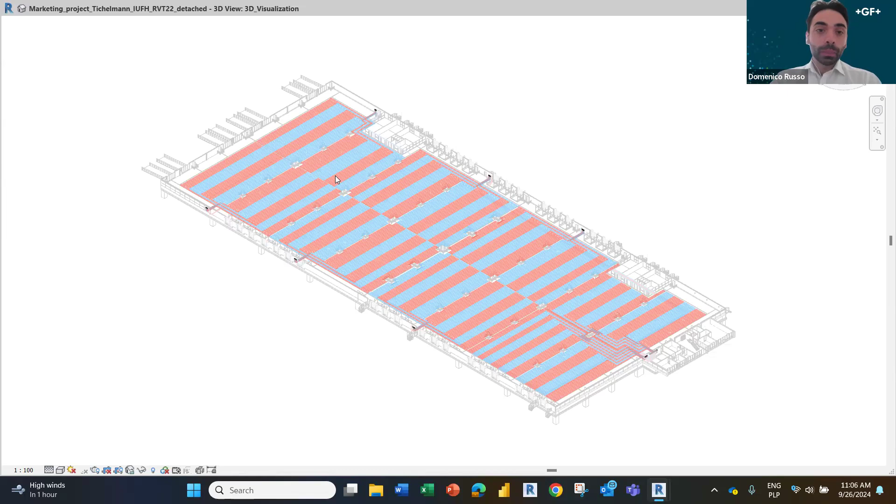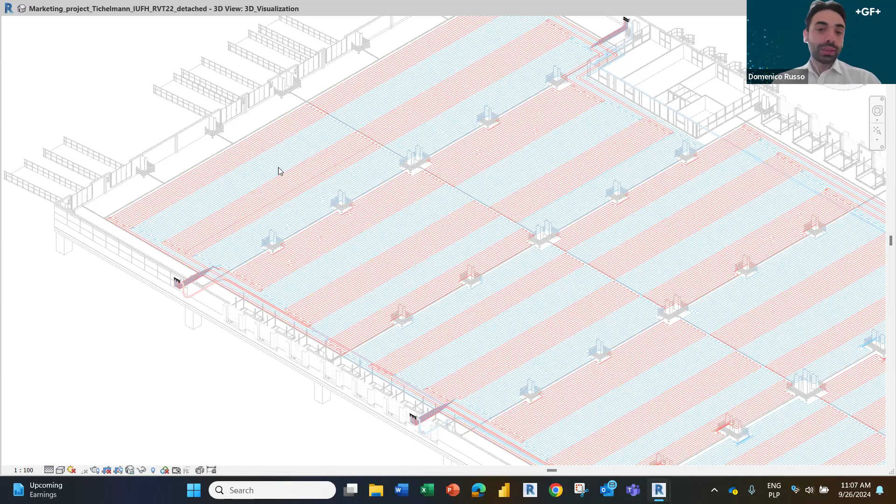Let's start. The first model I'll show you is industrial underfloor heating. This kind of application is really rising on the market because logistic companies, but also real estate, design and build companies in this field are now digitalizing their processes. They want the digital model for the construction site, but also the asset information model for facility management when they hand over the project. So we see a lot of cases regarding this kind of installation.

Specifically, I'm showing you a Thermoboard... sorry, a Tichelmann solution that optimizes the number of manifolds with the loops, so it covers a great area. The detail shown here is very high, but I can guarantee it's not only for the test — we have very high quality standards also in the modeling and in the drawings.

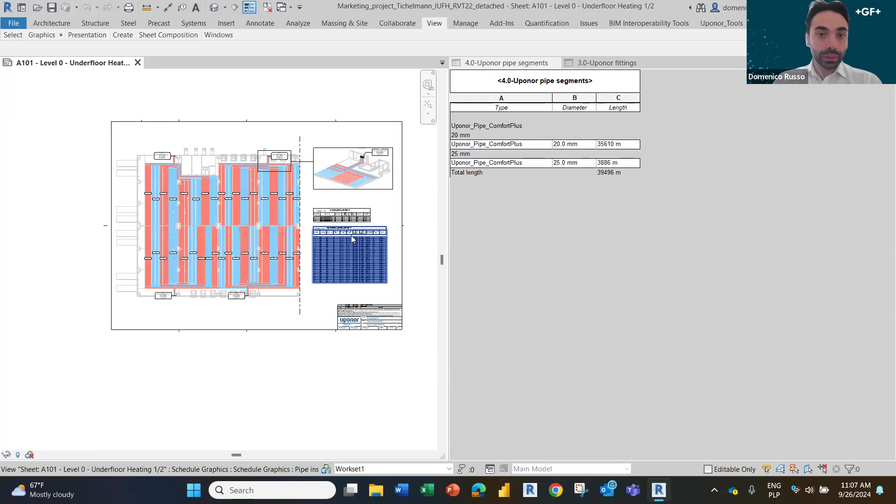What I think makes this kind of design really helpful is the construction documentation. In all of our models, you can find a space dedicated to technical drawings and hydraulic calculations, which are always useful for the designer, but also for reading the settings of the manifold for installation. You can also keep track of the materials used within the project. This is the first example, so let me switch the screen to the second.

Another installation, always radiant heating and cooling. This is an installation realized with our Thermatop panel. This is also a kind of installation we receive often, generally in offices but also in multifamily houses, and it's very often combined with underfloor heating. So this is used mainly for cooling, and underfloor heating can have only heating or combining heating and cooling.

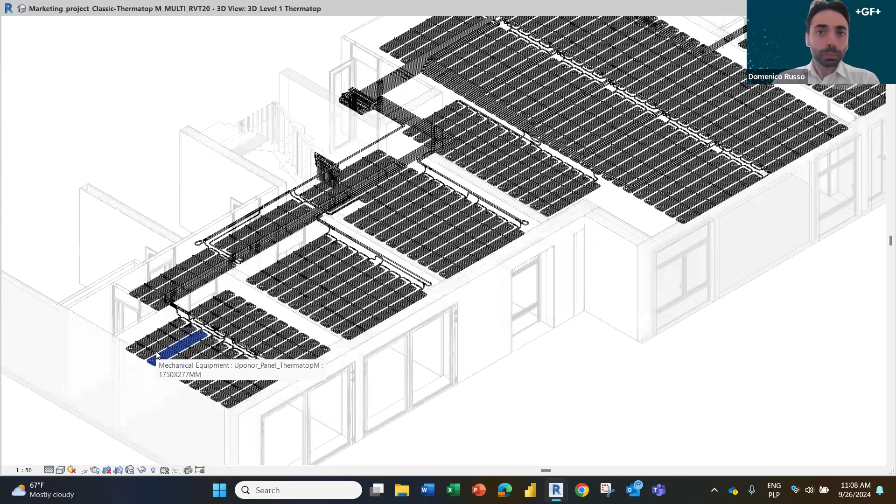I'll be very obvious for the Revit user, but I think this model is a clear example of what coordination means. Probably with underfloor heating, not always will you have the need to coordinate with other disciplines, but with the Thermatop panel ceiling solution, this is very important. So in general, the manifolds are in the technical rooms and they need to be coordinated with the other installations.

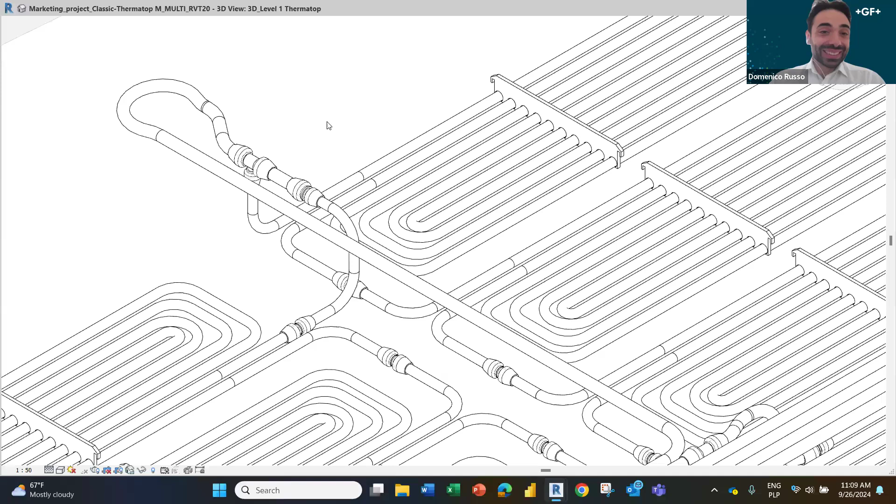But also here is where I become very obvious. As Chris said, we are not designing in AutoCAD anymore, where a line is a line and could be everything. I have a background as an architect, and I'm not telling you what I did in my drawings at university. But here, if you don't have the space to bend the pipe, it's visible, and if you need space to reduce from one dimension to another, it's visible. So over here everything becomes a bit more serious.

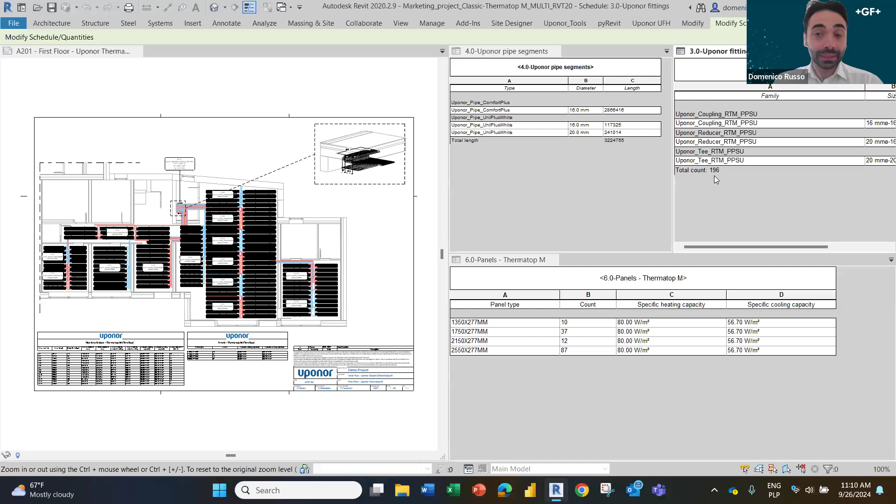As you can imagine, you need to keep up with this information also in the bill of materials. One thing is to keep track of the blocks in AutoCAD files. Another is to have, after you configure the system, the automatic coupling, reducers, and this, also when a different size of pipe is used, different kinds of panels, how many there are, and so on. And also, as I mentioned before, technical drawings, hydraulic calculation, because this is also part of our standard.

Third example. I don't want to show you only radiant heating and cooling, because Uponor is not only that, but we are extensively in the design of plumbing solutions. So I'm showing you another model that, to be fair, is the same example Chris was using for the training. I'm showing you a larger use of it.

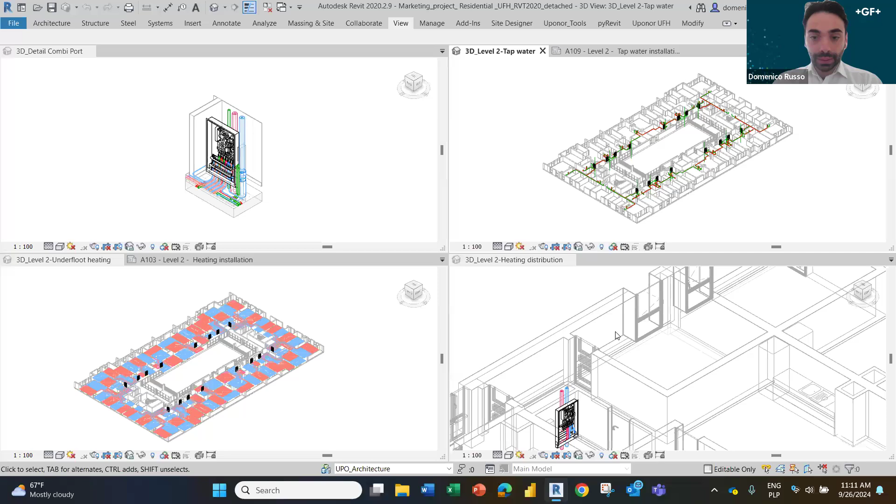Here there are 3 installations combined. So you can see our loop—this is underfloor heating. There is heating and cooling distribution and tap water installation with a ring installation in this case. Our German attendees will be very happy because it's one of the solutions very used in Germany. And we connect everything with another key product of our portfolio, the CombiPort.

That is a system that enables you to decentralize the primary network on the level of the apartment.

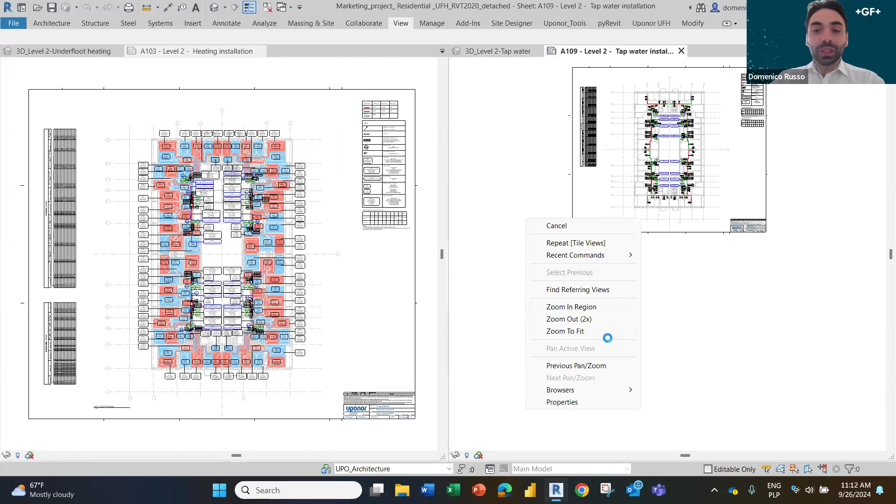Why I'm showing you this is also because as a Revit user, I know how boring it is when you have a lot of information in the model—you have different components, different project parameters, everything assigned to components, and when you use different tools, probably you'll have a lot of parameters too. I'm not saying we don't use different tools for all the installations, but what we try to do is always align all the information to our matrix of parameters.

This is something we're really proud of, because we studied each component of our library, so we know where the project parameters are, to which Revit category they are assigned, and we use a matrix of Uponor parameters for all the installations. Now you see a lot of them because there are 3 installations plus the CombiPort, so it's a quite challenging example, but in general, you know how many parameters other software can inject.

So this is also something I wanted to show, and obviously parameters will be stored and then used indirectly to populate the drawings with tags or the sheets with schedules. Okay, I have a last example for you because I see I'm going a bit long.

This is something that probably is not very common, and many customers do not associate with us. I can tell you our colleagues from the US are really into this kind of topic—prefab solutions and kitting projects. In this case, I'm showing you an example of a prefab bathroom pod.

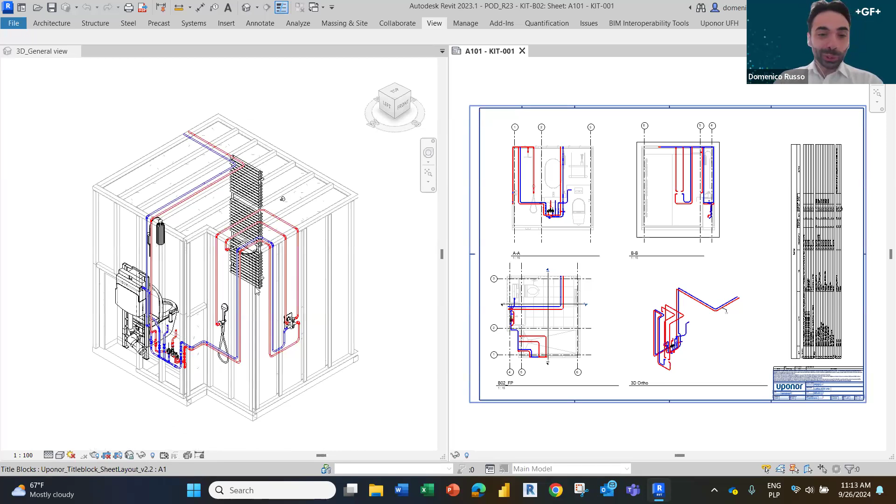So here the model is pretty small, nice, quick, very handy to show. And what I can tell briefly here is that it's easy to imagine the main use of these models. When the customer receives this model, he has a digital prototype to validate before building it.

So before going to shop, let's say - this is something that already enables the designer or the modular offsite company to see where the adjustment needs to be done.

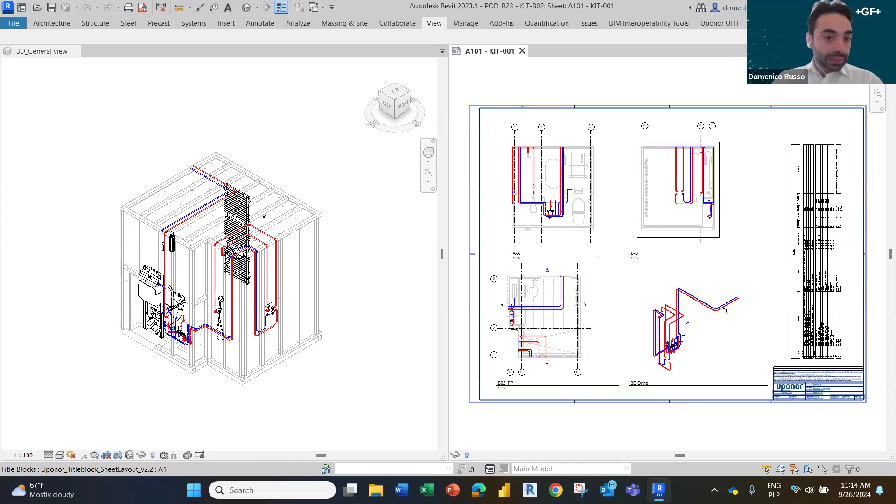Together with the design that we propose, there is always the bill of materials, the list of products to order. Here I really appreciated the cooperation we're having lately on this topic with our customers, because in general we cooperate with the guys realizing the project. We enter the same common data environment, exchange the file there, and make the adjustments on the request we have. I have to be honest, it's a really pleasant cooperation, also because it's not only about delivering the model, but arriving at the solution together.

Obviously, I'm not hiding the advantage here: you have the list of products to use, and with our sales representative, you can directly access the products. Well, this is the model I wanted to show you.

As I said, for time reasons I had to be brief, I could not show you everything. But as the other guys showed, we try to keep all the information on our platform. So if you go to our website, BIM Service, at the end of the page you find the references I showed, but also something more like EcoFlex. And yeah, we use the Autodesk Drive.

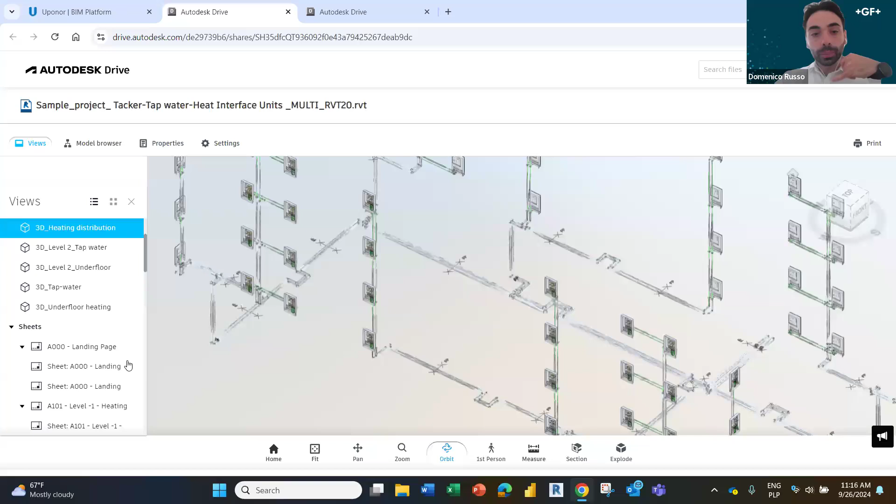This will be very comfortable for Revit users, because it has the same interface as the Autodesk viewer. It takes a while because it's a very heavy model - I opened it before but wasn't lucky. You can navigate the model, click, check the properties, check the drawings we loaded. Unfortunately schedules aren't visible in the Autodesk viewer, so we added them to the sheets so you can really touch the deliverable.

Okay, I go back to the presentation because I didn't mention the topic of price - I wanted to catch you first. As you probably read in the previous slide, this kind of service we give under payment. And it's not really about the payment, but about the value of the service.

I've shown you an example of a certain size, but depending on the kind of installation you choose or the time needed, there is the work of a designer that, even if the process is smooth, can take dozens of hours. So in general we put a value to this service that doesn't always mean there's a price, but has to be combined with our product offer.

So in general, for this process you will always get in contact with our BIM ambassador and one person from sales, and in the context of the project we'll evaluate the business opportunity, which is generally connected to the possibility to sell the products.

Here we are not a design office, so we do not compete with design offices. The asset of this service is that it's complementary to our products. And one more thing - what I showed you today, I can really vouch for, because we prepared the design standard on paper. So before each project, you will get the timeline, the price, and the technical specification, meaning which objects are in your model and which parameters you find. This is a way to ensure you get the quality you expect, because you receive this beforehand.

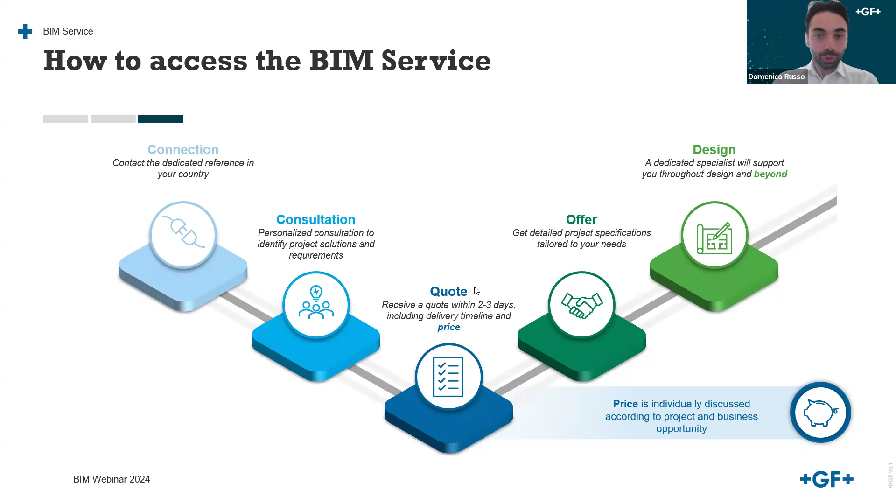Our support is for free. We'll be very happy to cover all your questions. I tried in the meantime on chat and Q&A to answer your questions, but if you have more, don't hesitate and contact us directly. I'm checking my time as well. We have 9 minutes, so I will go for the final recommendation. Maybe then we can see if there's some question we can answer live, but I'm not sure about it.

I also have the honor of making the conclusions. Here's what I want to tell you: obviously there are different channels that you can use for getting information. BIM platform is first of all. Then we have also our Uponor campus with courses on modeling and on the use of UFH. We have some YouTube videos too, so there's a bit of material you can look at. But we would really appreciate if for any contact you can reach directly to me, Chris, or Miko.

Through the BIM support email. So you have seen today all the levels of our offer - the library, the plugin, the service. We had a bit of trouble finding the best way to make it catchy and presentable, so there's a lot that we couldn't tell.

I want to also add something personal. In general, we are a very enthusiastic team. Miko has a lot of experience in Europe, in the UK, in the Netherlands as a project manager and as an HVAC expert. Chris is a brilliant designer - he can give advice to all the designers that we meet, he always has very brilliant ideas. I was a BIM consultant, so I still feel a bit like a BIM consultant - I know something about Revit, Python, Dynamo. In general, if you get in contact with us, we are always eager to see what's happening in the market and where the topic is going. So we truly invite you to get in contact with us, not only for what we showed today.